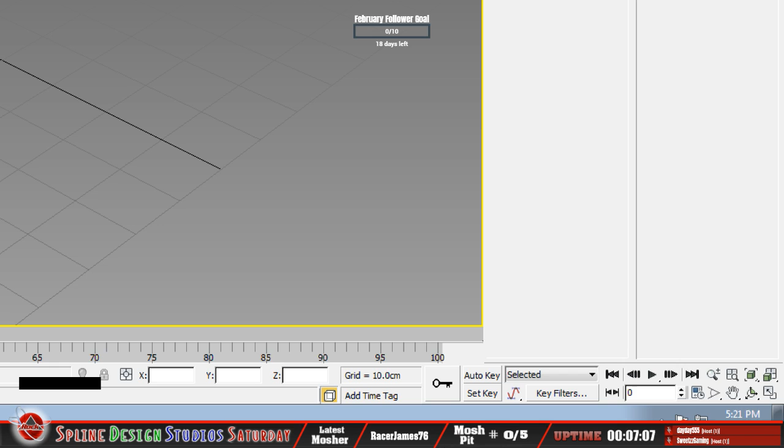If I do this, it ought to work out kind of nice for being able to show off, especially in Sandbox. So if I right click out of that, because one of the things I was looking into last week was how you get the coordinates for the pit stalls, and the fact that even for myself I couldn't see.

You got to really look down there on the bottom right corner. So this little tool I got here lets me zoom in on this and kind of show that off. The only problem is it doesn't allow me to use the cursor, but at least it'll kind of bring it down there, I guess. So something else I just kind of got a hand on. I don't know if it'll come in handy or not.

Okay, so let's get out of that. There we go. Yeah, so that works, getting in and out of it at least anyway. I don't know how well that'll work. It works well for things that are static. So, yeah, just noticing that if I do zoom in on it, it kind of makes those numbers go away. I don't know if that's going to make... well, it may or may not, because as you see, if I bring that back on, I guess it does. The only thing is like if I'm on the...

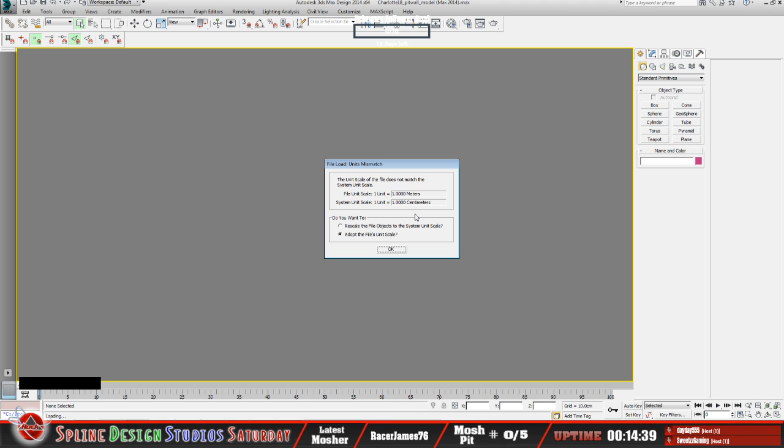There we go. And what I did... oh crap. Crap, I forgot I was working on farm sim stuff. Yep, trying some things out, so I gotta rechange my adopt the unit scale. I don't know.

I'm gonna reset this, yeah, because I don't think it's gonna take that. So I gotta adjust all my units of measure back. It uses a different unit of measure when you're dealing with farm sim stuff.

So I got some things to hopefully showcase, I guess, as far as farm sim editing. I've gotten into the map editing as well, to include some... okay, so that's good, and that's good.

Just gotta check these two areas, so that's got to be in meters and that's got to be in meters. Okay, we're good. So I'll go ahead and open it again. I shouldn't get that dialogue again.

But yeah, as far as just individual static items, as well as have been tinkering with some map editing. Farm Sim 19 is way more complex than 15 or 17, for that matter, as far as how it... like I said, I won't go into too much detail about that, but there's a lot more involved with it.

It's huge. I mean, it's nice, don't get me wrong, as far as what they got in there, as far as what you can do now, as far as designing your map.

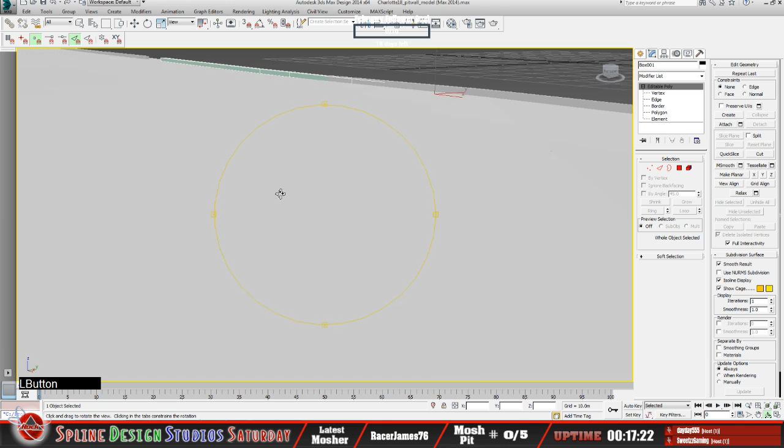Zoom in on this. So yeah, I think we did already turn it into editable poly. One of the things that we came to include last week as well was the fact that when I put this in here, this wall... get over here, kinda hate when it slows up on me.

Oh, okay, yeah, so this is the rest of the track mesh, so you can see the difference. I still have, I didn't chunk out this part. This is a part of the DAE as far as the track geometry that we imported in, and then we started this part of it here, so it's kind of overlaid on the new piece.

So if I hide the track mesh, you can see there's our newly 3D modeled wall based on... that's without the track mesh in there.

So one of the things I was going to point out, I guess, as far as the height of the wall, as far as the way the wall was oriented there, when I exported the DAE, I still had it in the other orientation. We had to change the thickness and the height of the wall.

So yeah, when I did the DAE, I did not transfer that over. So we had to reassure ourselves that we were creating the newly 3D modeled wall in the proper size, as far as the height of it and the thickness and all that jazz.

Because just to kind of give a little bit of summary on that, if I highlight this geometric wall, we changed the thickness, whatever, to a 0.45 as opposed to a 0.50, and then the height of the wall was a 0.5. So when we were creating our new 3D modeled wall to what we wanted here, we didn't have it this way in the model as far as the exported DAE.

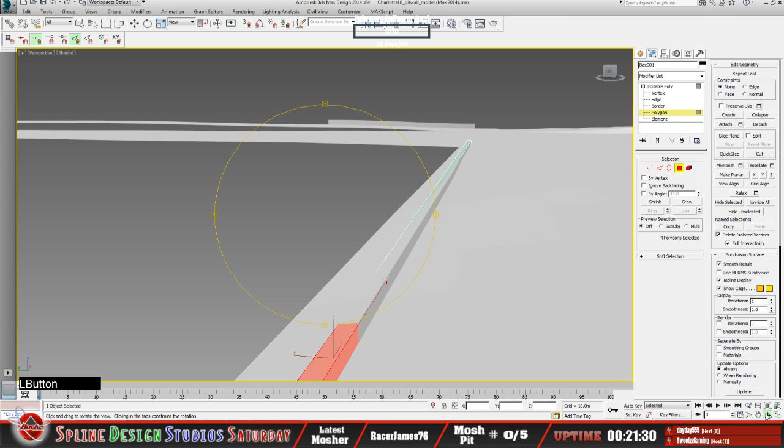So we're trying to, at least, we kind of dissected, I don't know if it'll let me select. Let me focus on this part here, zoom in on that. So yeah, if you notice, what we tried to do is dissect the 3D modeled wall into the geometric wall, because it gets narrower in this part. This is primarily where it starts to, so that's not very useful to us as far as the geometric wall. So again, that's why we've had to create this 3D modeled wall to help correct that.

So what we did was just try to dissect. Let me go into vert mode here. If I grab this vert and zoom in on that, just so we can get an idea of what's going on here. So as you can see, here's the geometric wall, and it's kind of maybe somewhat hard to see. You can see the geometric wall, how it's real skinny right here.

This is what we're trying to replace. So the fact that it's got all this bow and all that good stuff in there, we can get rid of a lot of that with this 3D modeled wall. Because we do have curved sections in here, as far as tracks, geometric track segments, we can fix a lot of this warpage.

As well as this taffiness, I guess, on the geometric wall. So that's how I've got this newly 3D modeled wall kind of set up that way, so that it takes advantage of, we have that as an option. I guess that's what I was trying to be able to fix a lot of that. So we should be to the point now,

with all that done, to texture this thing. And I did put some, let me get to this end here. So there's our opening, there's the other end of the wall. I'm going to go ahead and hide the track mesh again, like so. Now here's our 3D model wall.

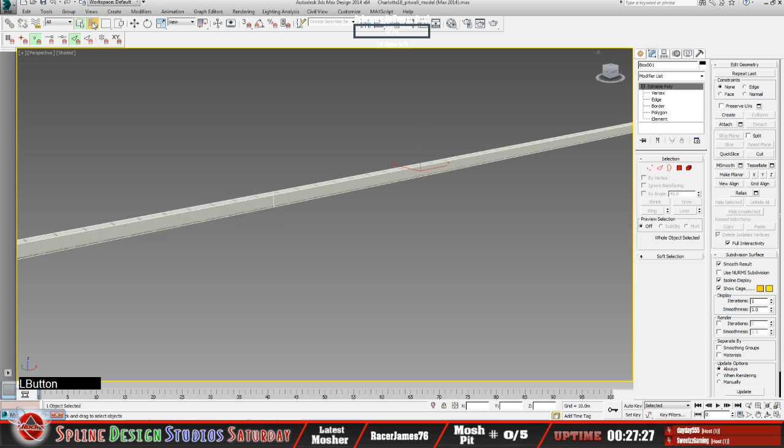Okay, and then here, let me do it this way. This might show it a little bit easier. So if I hide this, that's just the top, so that'll have its own texture.

So what I can do with this one is I can go ahead and just hide this one and bring back the other piece. Box 1. So we want to texture this with just the wall texture.

So vertex, I'm just going to highlight this one, zoom in on that, just to kind of get it to focus a little bit more. So the top part of that wall, as far as the entire model goes, is not present here. So the only thing we're dealing with is just texturing the ends as well as the left and right side wall. It's pretty good actually so far, but I'm going to check the mapping on it anyway.

We're going to apply an unwrap modifier to it. We'll check the texturing of it. Alright, so let's do that. So if I go...

Whoa! 7 months. Holy crap, 7 months. Scared the bejesus out of me, dude. Yeah.

That's interesting that it actually worked, because I know Twitch was doing some things with, I don't know if you're aware of that, James. Thanks for that, anyway, by the way. But to help explain a little bit as far as what Twitch was doing, they have what's called cumulative subscriptions, which means if at any point, as far as subbing to a channel, if you have a gap in there, as far as like, you know, if you miss a month or two or whatever, it'll still count. So like that 7 months that you have, that's amazing, by the way. I can't believe it's been that long.

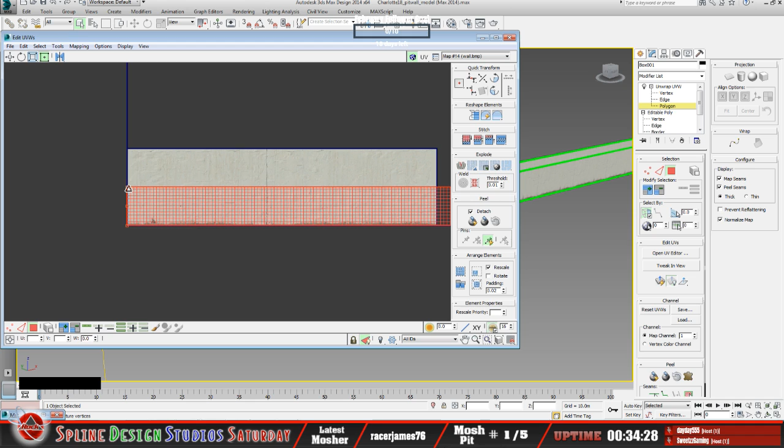I'm going to go ahead and select this one, and I can do a shift and just drag this up so it stays straight, like so. That should be pretty much all we got to do.

I can keep this, and I didn't apply any type of normal or flattened map because the way this initially presented here was okay. Sometimes your polys that you got selected won't be like that, so you'll have to play with the mapping as far as either flatten or normal map. In this case, it's a pretty simple object, not that complex, so it kind of presented itself pretty good. The only thing I really had to adjust was that.

So if I look at the deal in here now, all it did was I just stretched it up the top edge of that poly up to here. So now this is a 1-to-1 as far as the orientation, to get the dirt on the bottom, and I just moved that up to the top.

Let me see if I can show how that changes. Let me zoom in on this enough, go back into here. You can kind of see the texture actually adjust on that poly as I do this.

And this is a little bit off too, now that I look at it. If I zoom in really close, you can see how much that's off. So I'll go ahead and adjust this again.

Alright, so let's try another poly here, still in the unwrap modifier. So now we'll do this segment of the wall. So we'll go into this, and it'll be right here.

I may be able to get away with not having to move that, actually, but I'll probably go ahead and do that anyway. I'm considering whether or not I'm going to apply ambient occlusion to it, which I don't think I'll need to. I don't think it'll be necessary as far as applying any shading to it. So what I can do is, in this case, I can probably just move this.

And I won't have to do a flatten or normal map. It's much the same as the other poly. All I need to do in this case is grab this, I'm going to zoom in on it more. Actually, what's going on here? Why does it have this... whoa.

That's got like a height change on that. That shouldn't be. Or did I not change it? That's a good question, let me see here. I'm going to have to check the heights of these verts, because I don't remember if I didn't think I did, but maybe I did. Let's see, I might not have changed this all the way through on the height.

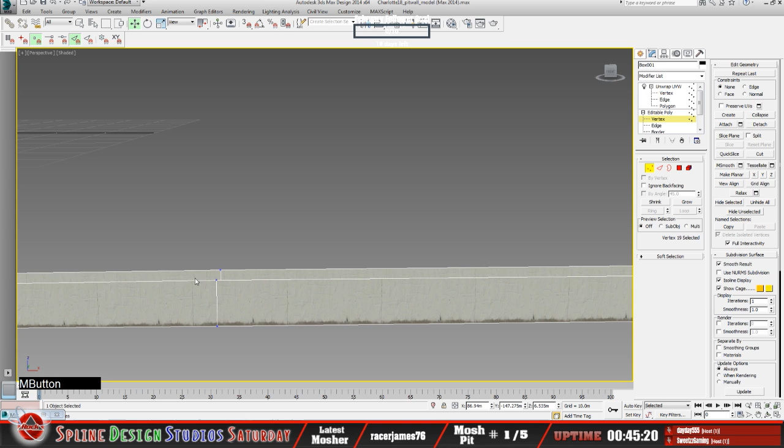Alright, paste that in. Yeah, so we got to bring this all down. And I still have it copied to the clipboard, so all I have to do is the same value. I just got to bring this down so it all matches. This was part of the adjustments I made to the height of the wall and all that stuff, and I did not transfer that over.

And I think the other thing I might have done, I don't remember - it's kind of going back to last week there. I might have just lined this 3D model wall to the geometric wall, which may not have been a good idea. So we definitely want to have this 3D model wall the same height. Okay, so we just got it right here, so get that.

That's definitely not all the same height. Oh man, what the heck did I do there? That's not too many. What the? Alright, what's going on there? The heck? Hold on. What is going on there?

So that can't be right, what's going on? Why is it going down so low? Yeah, see, I might have a bottom piece there - I might have to get out of that too, because I did use a box to create this thing. Not sure why it's doing that though.

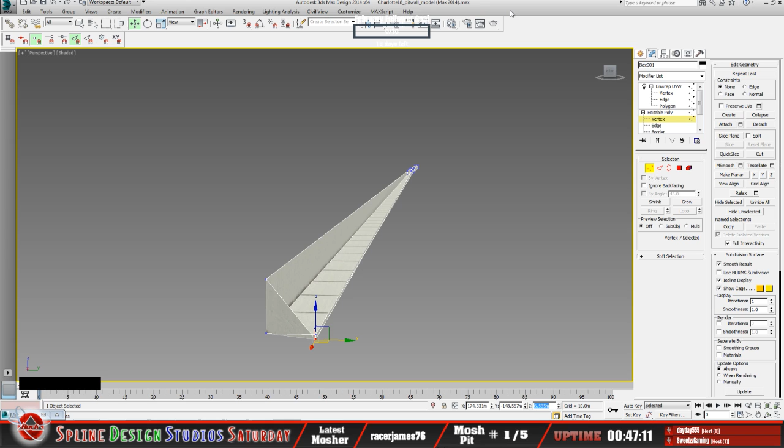I got this to one vert. Interesting. So if I paste this over - what the? Why is it doing that? I don't get that. Huh, alright, Control Z. There we go, bring it back. Yeah, so I don't know why it's different on this end. Something's not - what is going on?

So I was able to adjust all the other verts. Something's not working out right here. Let me check this again. It's a long piece. Alright, so here's this one. We'll get down to the bottom of this. Alright, so if we zoom in on this - huh, am I not copying and pasting that all the way through?

Let me see, something's going on. Should be able to adjust that to the same height. Alright. Sheesh, okay, we go like this. We'll zoom in on that. Paste - what the? I don't know why it's doing that.

It's not like I'm adding a digit or anything to it. Hello, Control Z. Hello? Alright, I don't know why that's not working. Yeah, I don't know why it's doing that. I should be able to put all these heights the same level. Why is it doing that?

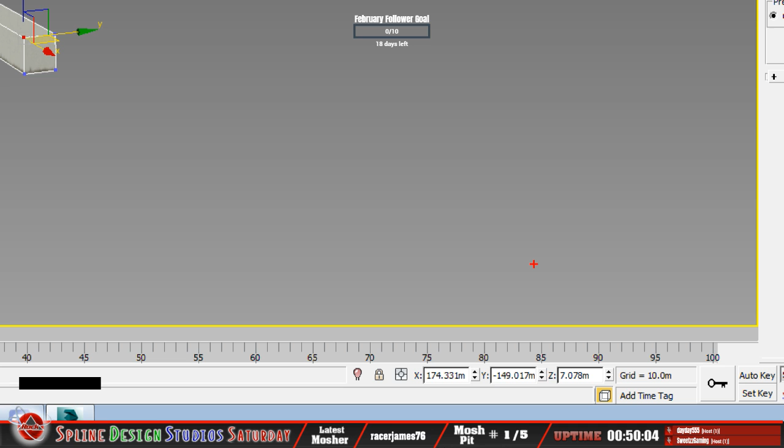Huh, yeah, this one's at a 7 - I don't know if you can see that. Kind of show that, so this one's at a 7.078. Okay, we need it at a 6.533, I think it was. So the fact that it won't let me adjust it down, I don't know why it's doing that. That's kind of crazy.

Now it may have something to do with - now that I think of it, it might have something to do with the height values that I've got in the 3D model itself too, because it's based on the DAE. So I think what I did was I adjusted the height of the wall to that geometric, which I think was wrong. Trying to think here. Alright, let me bring the track mesh back, let's do that. Okay, I may...

Trying to figure this out. What did I do wrong here? Might have to keep that right where it is for now. Kind of see what's going on there. Yeah, because it obviously is not... the fact that it's squashing it all the way down to that, that's not what we want.

So that looks right there as far as the height. Okay. Let's get out of that. Hide that again. I suppose I'm going to have to leave that the way it is for now.

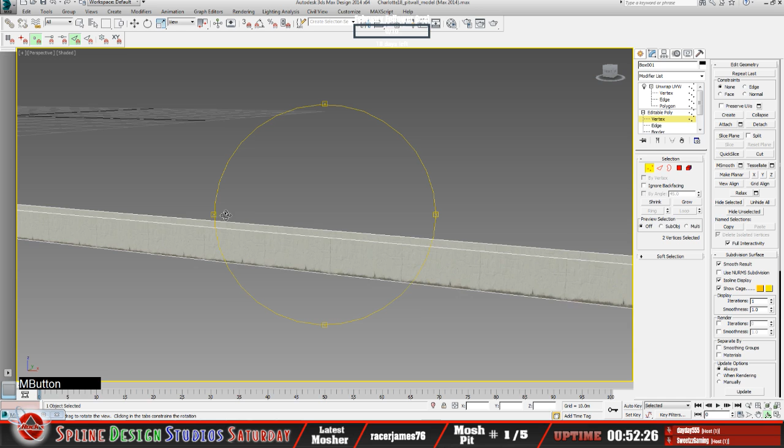Okay. Let me try this once again. Alright, so if I do paste. Yeah, that's obviously not what we want. Interesting. So we'll just have to leave it that way for now. I guess if we have to adjust it, we'll do that.

Let me check. Man, this is a long object, so I'm just going to focus on vert here and just zoom in on it so I can focus on that one area of the model, like so. And let's bring back in. I want to see the height of this part.

Yeah, let's bring that back. Unhide the track mesh here again. Yeah, see, maybe that's not what I want it to do. Because I'm keeping in mind that this model wall that I did here was not at the right height when I did the DAE. I was just looking for the location of the wall.

So, yeah, you can really see the difference in the height of the wall that way. I had it at a... I don't remember what I had the height of the wall at. Oh, this is going to bug me now.

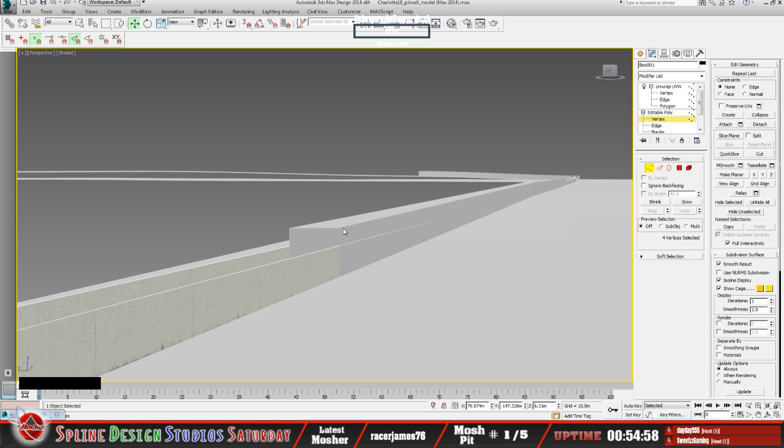So what I might try and do is do a new DAE and chunk that out so that we can line that up properly, because I did not have that set correctly when I did this exported DAE here. This is why. I think that's why I'm having this much problem.

So we'll keep this here. All I want to do is create a new DAE based on how we've got this correct now. Hello? Right here. Okay. Yeah, I think that's what I'm going to do.

I need a... I don't think I saved the other DAE. Let me check here. I don't think I did. I think I saved it and then just chunked it out and I imported it into Max. Okay. We're going to get this thing fixed because that's not going to work.

Alright, all I need to do, let's bring over to 3D SimEd, and we're going to open up that PTF in there. So let's go ahead with that. So if I bring up 3D SimEd, okay, and oops, I'll bring that back up. So the way we're going to do this, we're going to import, and I'm going to navigate to our track that we have currently loaded in Sandbox. That has all the proper dimensions of the wall itself, to include where it's oriented.

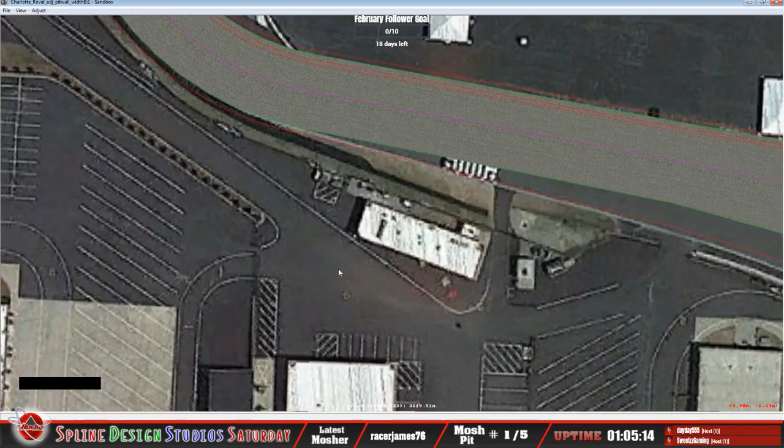So if I load this one, okay, let's do a new on this. Got that saved anyway. So if I open up this one, okay, and let's zoom in on that area. This one here, I still have the texture applied, and yeah, this one's not corrected.

Okay, that was the pit wall width. Yeah, so this one is not. Hold on there, yeah, this one's at the 0.45. The height is 5. See this part of the wall here, the geometric wall, I did not adjust that yet. That's why I'm using the other PTF, because that one is at the proper height.

Yeah, see, there was two different sections. Just to summarize, I did one section where I adjusted the pit width when we were adjusting our stalls, towards this end of pit road, and then I did a pit B to do it up to this point, and not this. So that's why this one I'm loading here that I did off stream is not set correctly, but this one I've got loaded to do the DAE, it is set that way. So it seems backwards as far as the way I label them and how they're dated. That was just to humor myself a little bit.

So this is where I did not adjust it yet, as far as this part of the geometric wall. It's still legit, because all of these walls that will maintain are the proper dimension. It's just not this one. So that's why, yeah, it's all good.

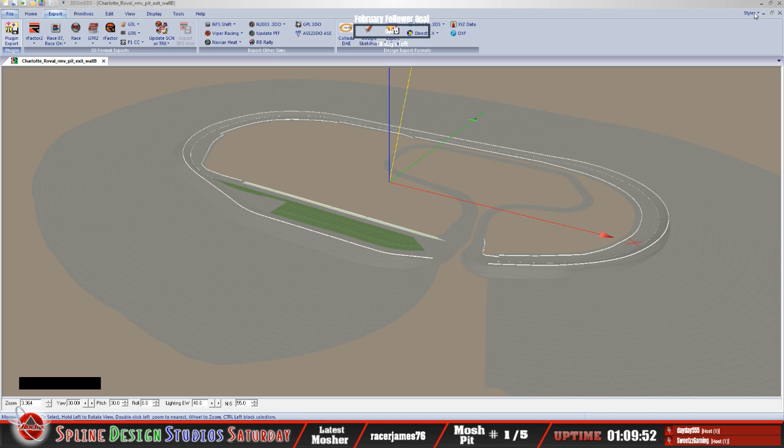So we're good there, so we can close this. Exit out of that. Alright, so now this DAE, let's leave that right here. We're going to load that into 3ds Max.

Kind of backtracking a little bit, like I said, but not too terrible. Actually, what I'm going to do is open up that scene again that we've already got saved, and we'll just re-import. That should all be lined up. Yep, so let's just go here.

Alright, we'll just open up this one right here. And what we're going to replace is this track mesh model. So we're just going to delete this one. Okay, and we're going to import the new model.

Okay, so we'll just navigate to that. We just put that on the desktop, which is this right here. And I'll have to chunk out a lot of stuff, but that's okay. Yep, just click OK on all those warnings.

So here's our new one. Yep, this is our updated geometry, so that should line up more precisely. So here's our, you can see our 3D model wall in here.

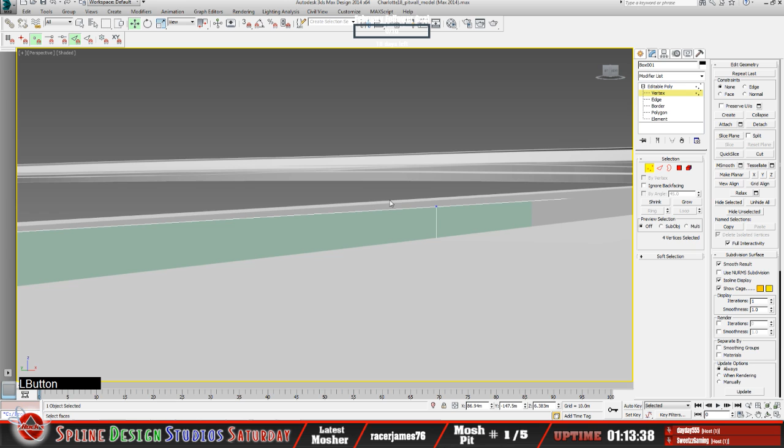So basically what it boils down to is we are not able to put all these top verts, I guess, at the same Z. Okay, again, because this wall, the geometric wall, that is 0.50 all the way through. Okay, we got to keep the top of this 3D model wall the same height as our geometric wall. That should hold true all the way through to this.

Alright, so if I bring these back up here, and this might be a little bit tougher because - actually no, I didn't reopen that scene, so I should be able to apply these two verts. Yeah, two vertices selected. So I should be able to bring this up like so. Yep.

And all I'm doing is lining it up to the wall, the geometric wall height. It's definitely going to be different. And I think this is what we did last week too, as far as just lining it up that way. The only thing, like again, we were trying to create - I know I sound like a broken record - is that skinniness, you know, the taffy effect that it was applying to the geometric wall on that end, as far as the pit exit.

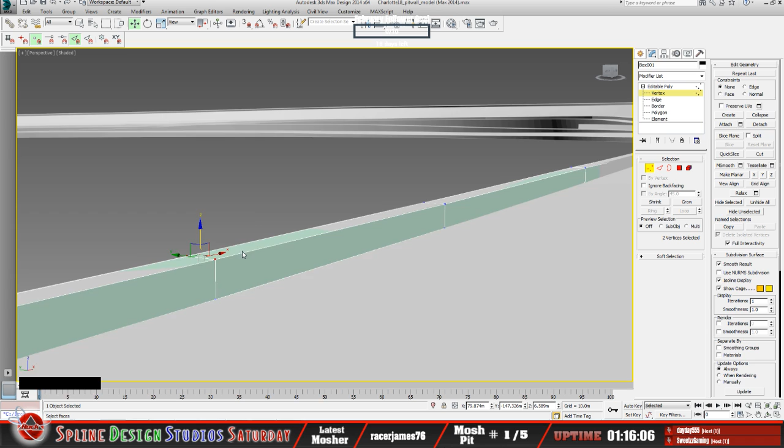And I could probably get a rough idea. I'm willing to bet that all these Z's on these verts here for the 3D model wall are not going to be the same, because of the trajectory of the pit wall itself. Because there's elevation in it, it's not going to be the same.

Because it's probably, yeah, I can already tell through the track mesh itself that there's a little bit of a hump right here. So that's going to change the height of that because the wall is actually going upwards. Keeping in mind that our 3D modeled wall is based on one point, which is more than likely probably down there than this end. So that bottom, as far as how it's figuring the Z for this top vert, for example, it's based on that point.

So, you know, a lot of that probably doesn't make sense. It makes sense to me. Because there's elevation in this, the heights of all these verts are not going to be the same. This is the bottom line.

So let's check on this very end here. Yeah, I can already see if I zoom in on this. Yep, if I zoom in on this, you can see, here's the geometric wall. You can see that poking through right here. So if I adjust these up and down, you can see how that's bleeding through. So that's the height we want that to be at, as far as our 3D model wall.

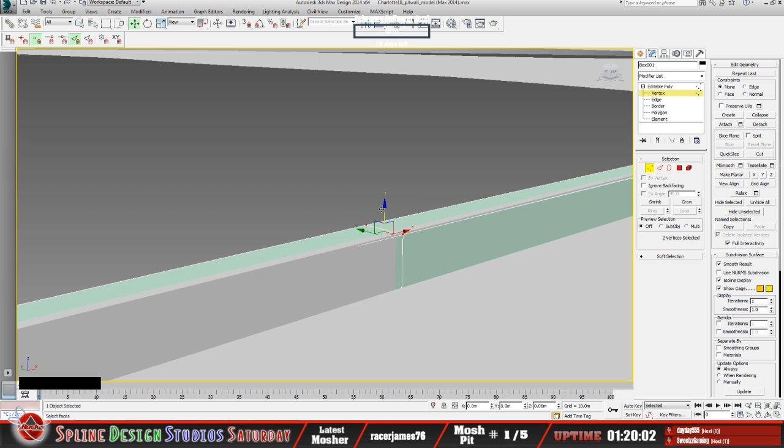So it's got that cut into the 3D model wall now. So now I should be able to go to verts. Select those two verts and then I can adjust those and zoom in on it. I should be able to adjust these accordingly, like so. Yep, trying to follow that contour of that wall as much as possible.

Now, by doing all this, now I think of this, if I was to adjust any of the heights geometrically as far as in sandbox there, that's going to change the attitude of this geometric wall. So that's something to keep in mind. But the fact that we'll have all the raw files, I guess, to be able to adjust that if that ever becomes a thing. I don't think we'll need to, but just keeping in mind, if you make any geometric height changes in the track in sandbox, in this area, at this point, if you were to make this model, that's going to change the attitude of this model. So I have to keep that in mind.

So I think we're pretty good on the overall design of this now. It matches the geometric wall. Okay, let me highlight this here so I can zoom. There we go. So let's, for the sake of argument, let's kind of humor ourselves here, so we can see that bleeding through. This is the green, our 3D modeled wall. Okay, so we're just getting it lined up to our geometric wall.

I can get really super OCD about how much of this will be adjusted. Yeah, see it's really close as far as, see how it's bleeding through like so. I think that'll be fine though, that should do just fine.

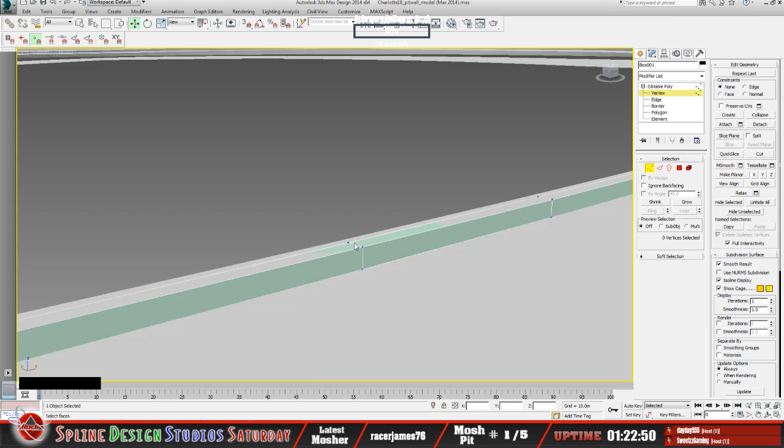I could do the same thing with the heights here too, instead of adjusting them all manually like I've been doing. It's not 100% wrong, but you can already see, if I get this vert, put the vert snaps back on here, that won't snap to that because there's no vert, because we did a swift loop on here to get this to match up. There's an edge there, but not a vert, so if I potentially put edge snaps on, I can leave the vert ones on too. It might snap to that. Yeah, so it'll snap to the edge at least anyway.

The only other thing that might cause more, it won't really keep this straight, so it kind of goes on an angle here. And you can straighten those up, that's not a big deal. But I think what I'll do, just for the sake of it, yeah why not, let's just go ahead and do it that way. We'll keep this stuff legit.

So we'll get it snapped to the edge, and then what you can do from here to get your vert straightened up here, because it's crooked now. And again, because there's no vert on the geometric wall for that to line up to, it's just snapping to the edge of the geometric wall, because we put a swift loop into our 3D model wall.

So what you can do here to get this straightened back up again is look at, in this case it should be the Y. And I can just check this one here, so 147. Nope, that'd be on the X, 79887. Yep, so you can choose at this point which one you want it to line up.

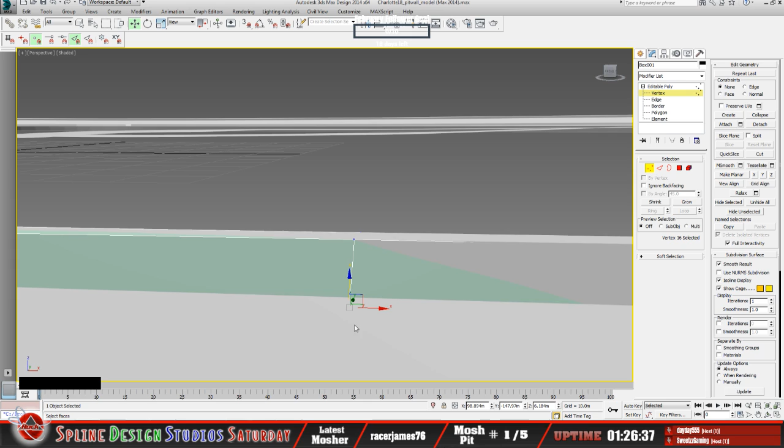Oh wait a minute here. Yeah, see this is something, okay this makes a little bit more sense now. So the fact that I was lining it up that way, I gotta move... holy smokes, okay so you can really tell again that there is some elevation difference in here. These verts here, so in this part here, this part of the elevation's got like a crown here, because the actual vert in this area is lower on this part here, so that suggests there's like a crown in this part of the elevation, or the cross-sections and what have you.

So what I need to do actually is, let me straighten this up first. Yeah, let's do that, let's straighten it up first. So we'll copy this. I see what's going on now, that makes a little bit more sense actually.

Paste this over to here. There we go. That one, let's get the back side. Yeah, I get this now, but I'm just trying to get this straightened up first.

Basically, because this vert is below the surface, I didn't need to adjust the top. That's actually taller than it is, and that's why this isn't the same height all the way across, because we're only considering the top here. We've got to move the whole thing, as far as where we swift-looped to here, up as well, so we can get that bottom vert snapped to the surface of the track surface itself, as far as the track geometry.

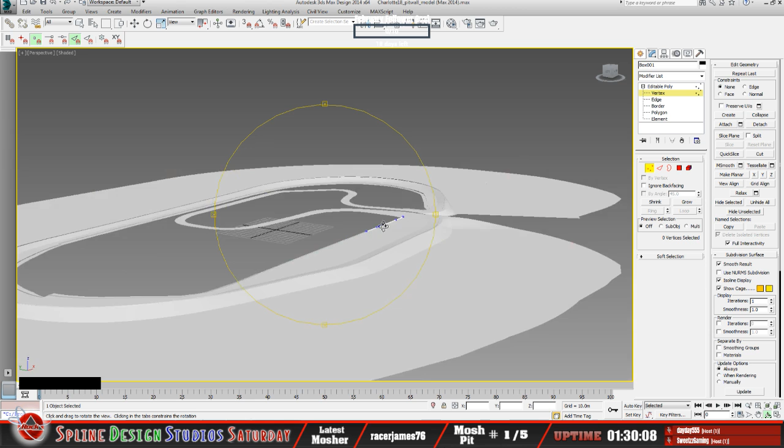The other thing we need to do too is get a lot of this track geometry out of here. We don't need all this, we only need this area. So let's go ahead and get some of that chunked out while we're at it.

Select this. Yeah, it doesn't really matter for now, I'll probably end up converting it over to a poly.

I want to keep some of the... what are you doing? I got it on poly, you dummy. Trying to drag select these.

So yeah, I'm going to chunk out some of this. We don't need all this information. What the heck are you doing?

Goofy thing. Let's zoom out some more, get some of this chunked out. We don't need this. This will kind of keep the file size a little bit smaller too, as far as...

Focus more on the area that we're trying to work on here, which is on pit road. We don't need all this. Okay.

Oh my god, I don't know why it keeps doing that. Goofy thing anyway. Yeah, I'm going to try and keep a majority of the pit road.

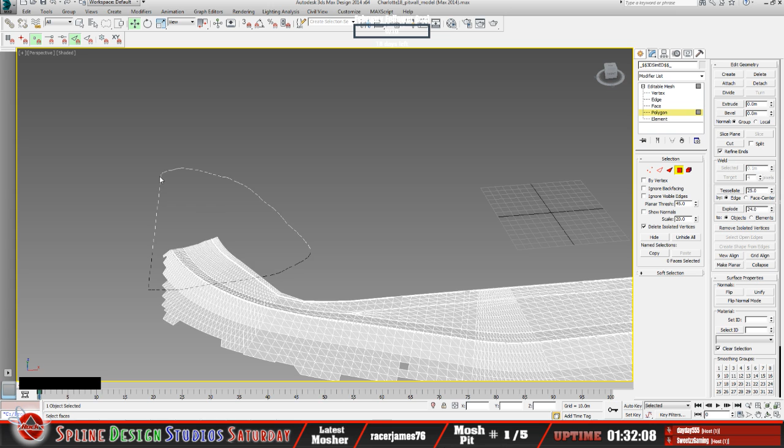I want to keep a majority of the pit road, so I'm just going to chunk all this out. Don't need this. This is probably a little bit better.

Okay, yeah, it's not too bad.

It's kind of weird not having any of that background music, and it's kind of a pity in a way that... the one stream that I did there where I had the music going in the background, it did kind of... yeah, so. Some copyright stuff on there.

Okay, that's looking pretty good there. Now...

What I need to do is segregate the geometric wall. So let me hide our 3D model wall, which is this deal. I'm gonna hide that. Okay, so now we just got that geometric. I'm gonna isolate, or try to, that geometric wall. So here we go.

Yeah, it's trying to load a lot of information, so it tends to get real slow. That's normal. See, when you highlight like this right here and zoom in on it, it'll kind of focus on that. This is somewhat what we started last time, as far as isolating that, because of all these little slivers. You can see all the polys that exist in here.

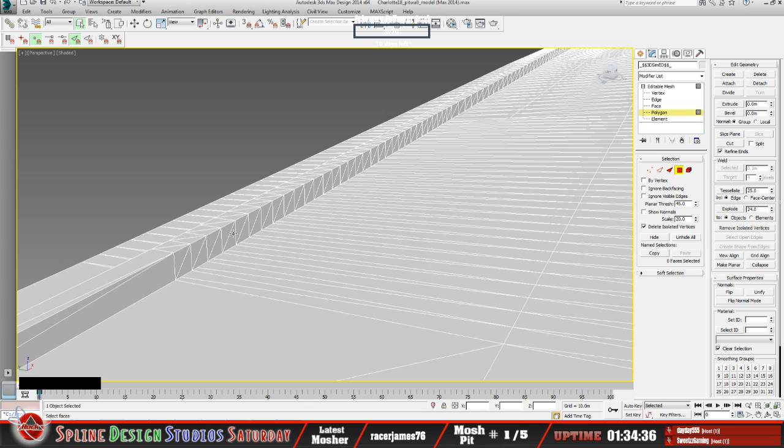It's not going to work this way, unfortunately. See, it's going to select all that. What I'm trying to do is isolate the geometric wall from what I could do, I guess. Let's just do it this way.

It's not impossible. So let's highlight this, like so. Yep, so we can get all this selected, and we can make that a separate object so we can better get at the geometric wall. Yeah, that'll work.

So this is using the paint select, and all these polys selected like so. Okay, so as long as you're only selecting those surface polys there and not getting the wall, we should be alright. It's kind of hard to see on that end. This is a lot of polys in here. I think we're good there, so we should be able to detach that as an object.

Oh, I know what I didn't do. But let me see if this still works though. So if I detach this as an object... Okay, it did work. Cool. Awesome. Alright, so now I've got that.

I'm going to hide this one. And again, what that does is it isolates more of that geometric wall. That's what we want. So we can better line up our 3D model wall to it, as far as the height and whatnot. Okay, so...

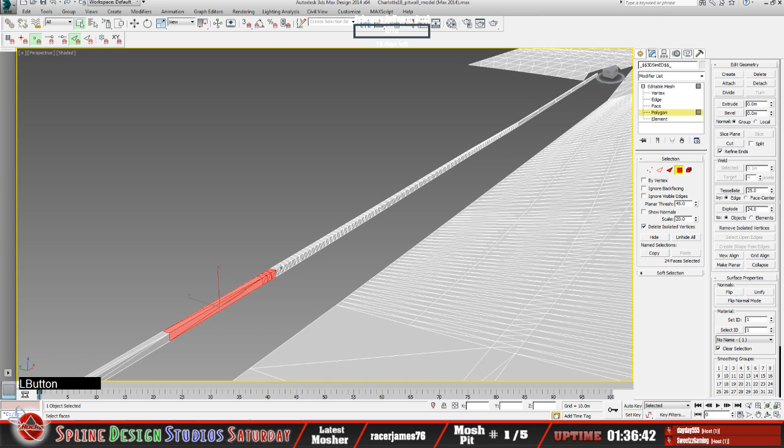Yep, so now I can paint... Hello? Oh, I gotta go into polys, that's why. Paint. Now I can highlight all this, create this as a separate object. Now there's a lot of polys. Oops, I forgot to put the control select on there.

Yep, something like that. Move this down. Hold control. There. Yeah, this would work a lot better. So now we got that wall selected. Now we can detach that as an object.

And you can label it. I'm not going to worry about it too much. But yeah, now we got that as a separate object. So now what we should be able to do, I'm going to hide the rest of this track mesh.

Bring in our 3D model wall that we're trying to create. So unhide that. That should be box 1. Yep. So now we can snap our verts and whatever to that geometric wall, as far as the heights and whatever, at least anyway.

Okay, so let's make sure we got our box selected here. And go to vert. No, verts. There we go. And I still got this on paint. Let me set this back to box select here. There we go. Zoom in on that.

Now what we can do is we can better align our verts to the verts on the geometric wall itself. Okay, so let's start with this one here. And we'll do these a vert at a time.

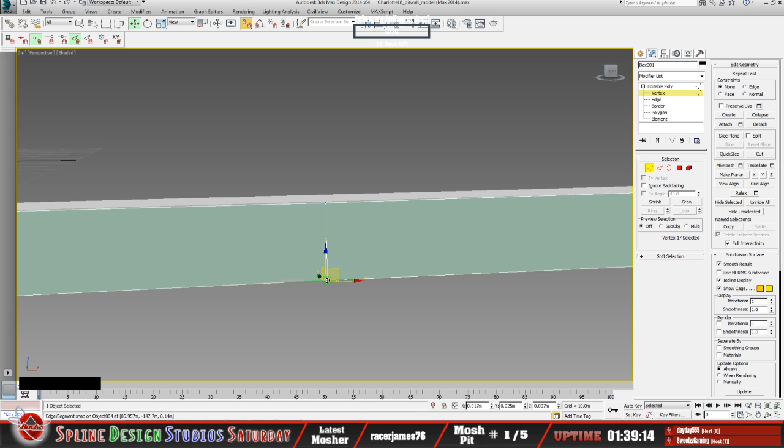Alright, so let's get this one here. Yep, so I'm seeing it turn. May not be perfect, but oh man, why is it doing that? Hold on. Yeah, because there's no vert there, it's going just by the edge of the geometric wall, as far as our 3D model wall.

So yeah, that should be good right there. And that should be good right there. So you can kind of see how it's semi-bleeding through on the geometric wall. It's kind of what we want. So I gotta get focused on this again. Zoom. There we go. Yeah, that's kind of what we want.

Now the only other thing we got to do is straighten up these verts here so it's not crooked. So we'll go by the bottom vert here, which should be the X. So we'll copy that, paste that to here. And all I'm doing there is just aligning it vertically is all. So that should be the same.

86.97, 86.97. And we'll make this one the same. It's not that far off, actually. Nope, not that far off at all. So that should be nice and straight now. Alright, next section here. So if we go down here.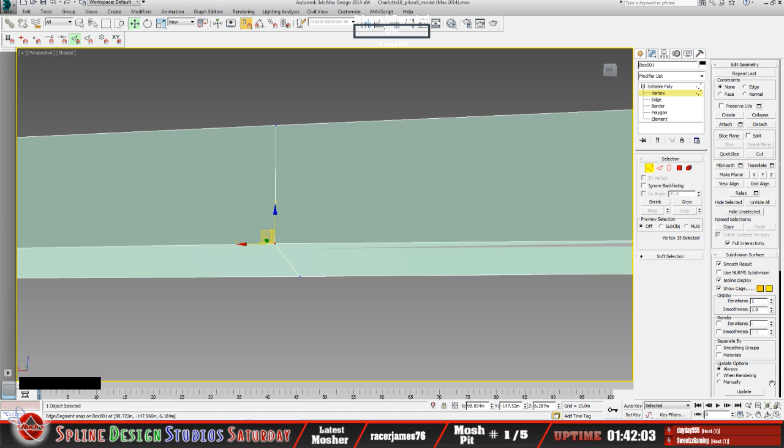So that's not working like I thought it would. No, it's really not working like I thought it would. So what I might have to do, as far as the edge snaps anyways, let's turn off the vert snap just for the sake of it. What I was hoping it would do is just snap it better to that edge. So what I'm going to probably have to do is just adjust that manually.

Yeah, let's do that, let's try it that way. So I'm going to take the edge snaps off. Select these two, and if I adjust it this way, so you can see the edge of the wall, that way. I might just have to do it this way. See how that's poking through?

That's what we need to adjust, because the actual height of the wall is fine, the top of it anyway. It was that part that was off, so we still probably have to adjust. Let's check it down here just for the sake of it, I don't know if that snapped correctly.

Okay, so if we go here, yeah, that one's actually pretty good. Alright, check this one. Zoom in on that. Yeah, this one's a little bit off, not too much. This one's actually pretty good, it's maybe a little bit low.

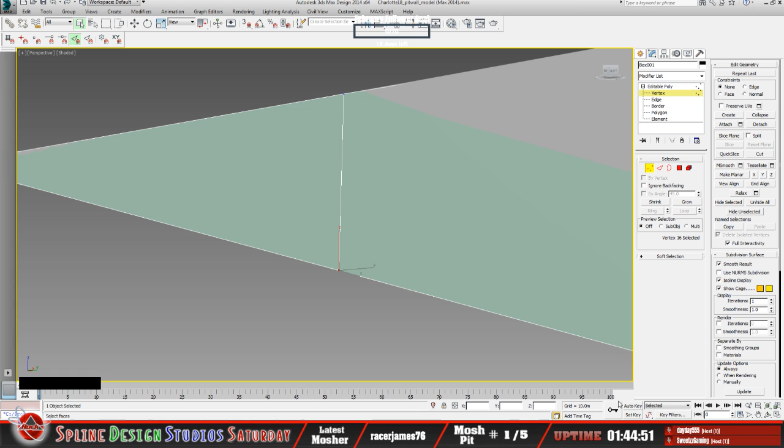Okay, not a huge problem though. So, yeah, this is the one I was checking out here. Zoom in on that. Okay, so, and again, I don't want to go by, you can see the geometric edge right here, it's kind of poking through. That's where it starts to get skinny, so we don't want to really mess with that anyway.

The fact that I'll probably have to take these faces off the bottom anyway, I don't need those, so let me delete those out. Yeah, these polys here we don't need, so that might kind of help our effort as well. Just thought of that.

So yeah, these, that's our inside poly. Okay, yeah, so these polys here, yeah, we definitely don't need these, so we'll delete those out. That's on the bottom, you're not going to see those, those are going to be face to the ground. Okay, so that should be, yep, that outside face there, that's fine.

So we're going to take all these bottom faces off this 3D model wall. Let's make sure we got all those out. This is a long section of wall, that's for sure. Alright, zoom in on that. Yep, so we got some on this end too. Alright, so let's focus on this. Delete that, delete that, yeah, that's just getting those bottom faces off of there.

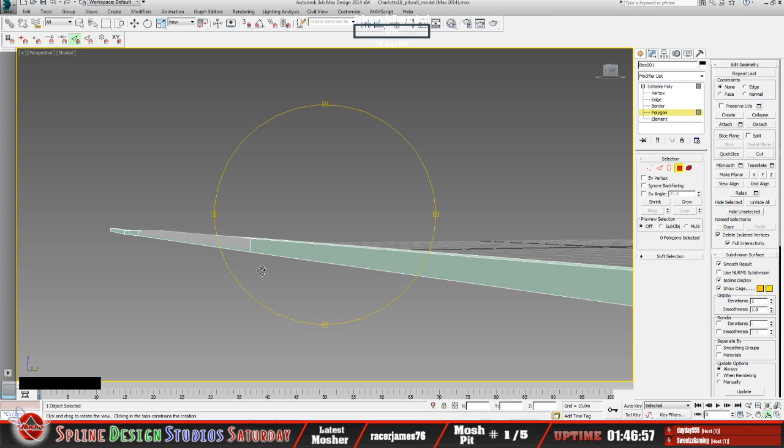Okay, I don't think there's really much more we can adjust. You can really see from this angle how much of a wonkiness there is in that wall, as far as how it kind of crowns up right here, and that's what we're trying to get adjusted. We're trying to get the 3D model wall to contour the same as the geometric track itself.

So the main area that it tends to do that, I might have to put another swift loop in here, is like right in through here, because this is our pit exit end. Okay, and we did put another swift loop towards the end there to get that adjusted, but almost thinking we need to put, wow, holy smokes, I can really see that difference here.

Yep, looks like we need to put another swift loop in here. I don't know if it's hard to see, but you can see right here. This right here, that's the geometric wall, the contour of it as far as the side profile. And this is our 3D model wall, which is the green. So if I pan this across, you can see how that geometric wall really changes.

So on this end here, this is going to the garage area, and this end would be towards pit exit. So you can really see how that geometric wall contours. Let me put this more on a side-on view, you can get a better idea. This is full side-on view, you can see that geometric wall, and that's at the right height. That's the height we need.

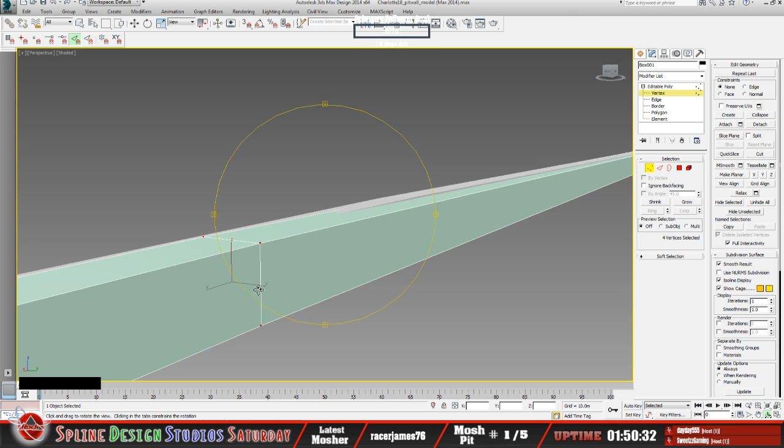Okay. So we might have to put maybe another swift loop in there. Yeah, it's not too bad there. Yeah, I didn't realize there was that much of a crown in that wall there, but it definitely is. Let me see if I can move these over. I'm moving all those verts that I just swift looped all together. They're all selected.

Wow, that's crazy. Yeah, seeing on this end, wow, I didn't really think it was that wonky. Apparently it is, though. See, I don't want to adjust the thickness of our 3D model walls. That's the thickness that we need it to be. It's just that it obviously has a crook in the wall.

Wow, okay. Yeah, there's a lot more going on with this geometric wall than I thought. I was thinking it was a lot more straighter than that, but holy crap, that's got a huge crook in it. Let me see, can we even see that, open that up here.

Yeah, I want this one here. Yeah, that was after the fact. Yeah, so I want this one. Alright, I want to take a look. I did not realize. Crap, alright, that's not the one I want. Let's try the other one that we saved.

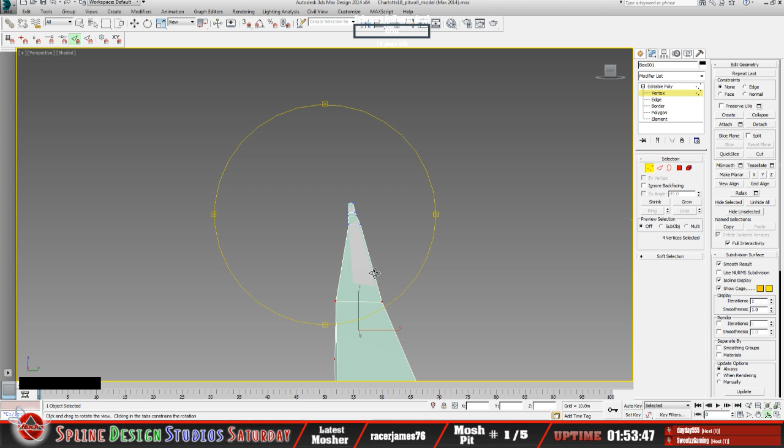Yeah, this is where it starts to get skinny. That's why we're seeing what would appear to be a crook, but it's not really a crook. As far as it gets crooked, it's just where it starts to get skinny. So, question is, how do I get this? Yeah, we definitely don't want that. Wow, this is such a long strip. It doesn't seem like it's that long, but it's pretty long.

Definitely has a lot more going on to it than I thought it did. Oh, shoot. See, what I don't want to do, and I guess this is what I'm pondering, I don't want to snap our 3D modeled wall entirely to the geometric wall, because we're trying to straighten it out because of the taffy effect, I guess, on the pit exit end. So I somehow need to figure out a way to get the trajectory of the wall correct, as well as keep the consistent thickness of the 3D model wall, and not go 100% by the geometric wall, because it's not what we want visually.

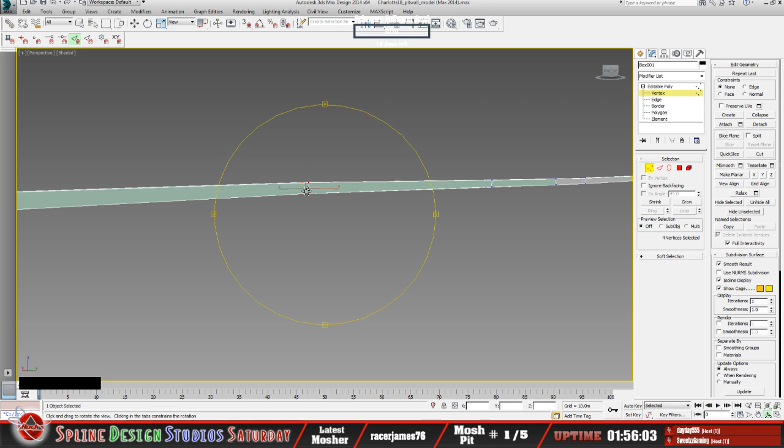Okay, so what I'm going to do, just to correct some of this crookedness because of how the geometric wall gets created, I'm going to do it this way. The height I'm going to change for sure, and then I'll check all the vertex coordinates to make sure that from here to here, the bottom of the wall and the top of the wall are the same height, because we definitely still want to maintain that.

Okay, so let's check. We're going to check the Z.

Okay, so actually that one's going to be higher, so I need from here to here that difference. Let me get that. So this one. Alright, bring the calculator out. 7.014 subtract 6.485. Alright, so that difference is 0.529, so it's a little over half a meter.

Okay, so now we'll check this end here. Let's check this difference. So this one's definitely different. But that's to be expected because I got this raised up.

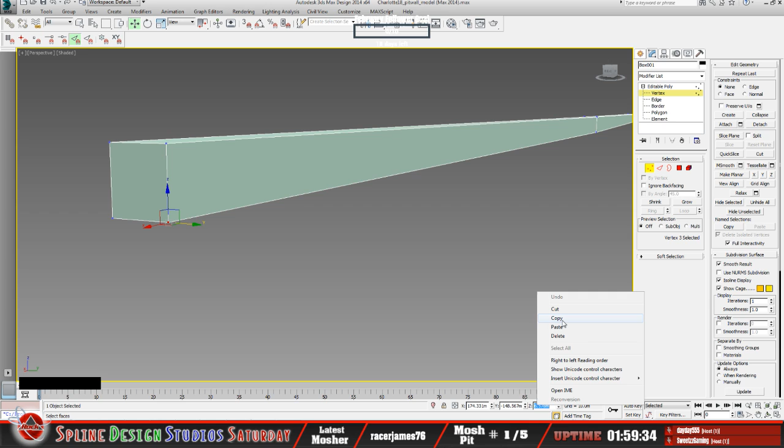So let's check this vert. It's definitely thicker on this end, it seems. It would appear. So copy this, put this in our calculator. We want things to be correct. 7.82, subtract, see how this one's going. Copy that, paste that in the calculator. Equals. Yeah, this is closer to what we need it to be. Okay, that's at 0.504. So this end is fine as far as the height of our 3D model wall.

As we get this way, it gets thicker and then it gets skinnier again, so that's not good, don't want that. So in order to follow the contour of the track as well as to maintain... how am I going to do this?

Alright, let's zoom in on this. This is definitely way too thick here and all that. Can't even see the... where's the... oh, there's the... is that the geometric wall right there? Holy smokes.

Okay, that's way the heck up there. Alright, so let's turn on... just for the sake of it, turn on our edge snaps.

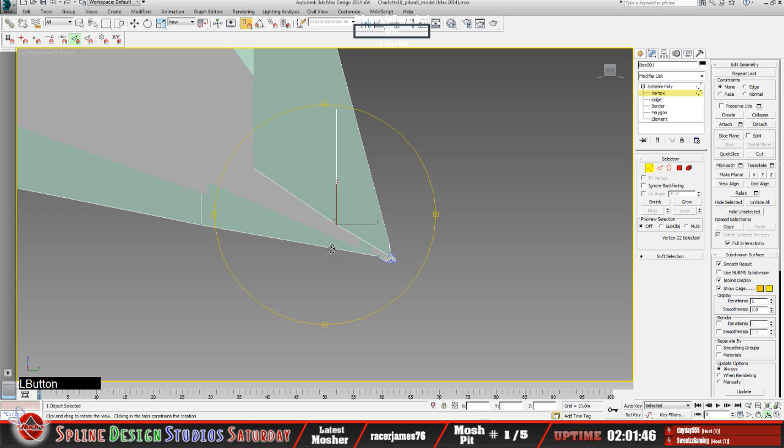Dadgummit, yeah, so it's definitely not going to snap correctly that way. Let's bring that back up. What? Yeah, because again, what I'm trying to do is get it to snap to the bottom of the geometric wall, and that's not working too well.

That's definitely not working like I was hoping it would. Let's try. Let's hide this geometric wall. Turn snaps off here for a second. Hide that. Let's bring back the... fudge, I forgot which one it is. Yeah, so there's our track surface.

What I might do is try to go by that instead. Yeah, this is the track surface that I segmented out, so you can see how much our 3D model wall is below the track surface. That's probably a better representation rather than trying to go by the actual wall.

Yeah, so let's try that. So if I select this, yeah, what I might try and do at this point is just trying to move. I don't know if I can do an edge snap, but what the heck? Okay.

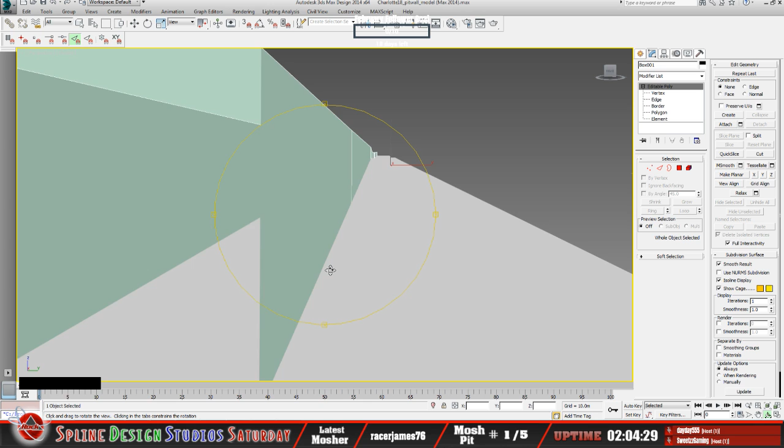Nope, nope, nope, nope, nope. Okay, go back, there we go. So yeah, what it's doing is it's snapping over here, so it's not snapping the way I need it to. So... gosh darn it, anyway. Freaking zoom, it's such a huge section. It's ridiculous.

Alright, so let's... yeah, but you can clearly see how far that 3D model wall is below this track surface. This is the track surface right here. So if I move this up like so, that's where the bottom of the wall now is mating with the track surface. So that's how much that's off.

Okay, so what I might have to do is just do that manually, as far as these different verts, to get that to mate up there, because it's not snapping the way I need it to. But you can kind of see now how it's... here's the edge of the 3D model wall, how it's more mated to the track surface just by moving it up on the Z on that.

So let's try and move this one. Okay, we'll paste this to here to get that the same as this one here. Okay. Yeah, so now we got that both the same there. So that might be the best option that we'll have there, as far as getting that mated to the actual track surface and still being able to maintain the thickness of the wall and what have you. So that's probably the approach we'll have to take to it, as far as just to move the verts independently. So yeah.

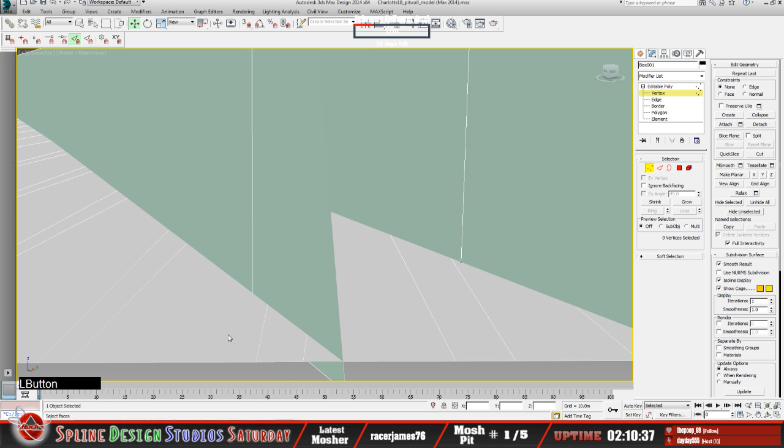So yeah, let's do that. We'll bring this one up manually like so. Alright, and then we'll just copy this vert location to the one on the back side of the wall, over here. There we go, just making sure I only got one vert selected. Okay, I'm going to paste that in here, so now I'll put that the same height as the other.

Now, check our differences between these two, so plug this in. Okay, so paste that in there, do a minus bottom vert. I can already tell this should be just by the value there. That's still a little bit much there, so I could probably bring the top down. The bottom's probably correct, but I could probably bring this down. Yeah, so the fact is I'm just gonna adjust this manually.

Oh, wait a minute, I took the wall out, that's right, I forgot about that. Let's bring that back in there just for a minute here, so it's object 4. Yep, so now I got the wall to go by. Yep, so just gonna bring that down a little bit like so, and then I'll copy that Z to this one.

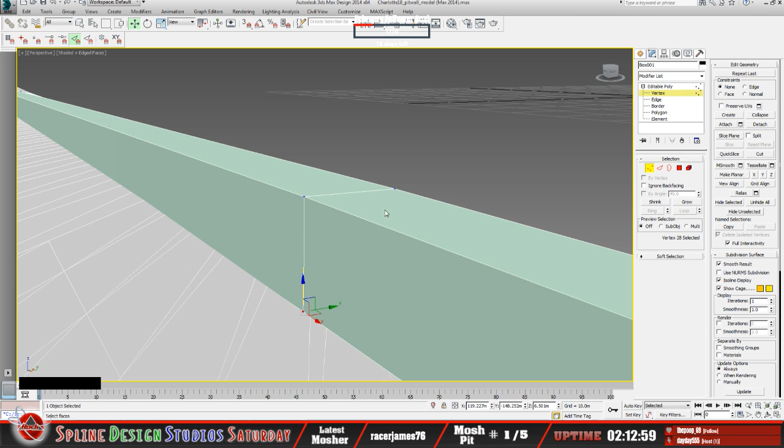Still going somewhat by the geometric wall as far as the height to get that correct. So now we got the correct height, pretty damn close on our 3D model wall. We've got to adjust this further down, all the way down, so we can see a lot of our 3D model wall is still below the track surface. So our thickness is right, our height is correct, so we're all good there.

Excuse me, need a drink.

A little bit more complicated than I thought it would be, as far as getting this aligned to the geometric wall, but also to the surface, because there's a little bit of elevation in there. But we need to definitely make sure we're keeping the height of our wall the same. We want that consistent all the way through and follow that contour. We don't want it to be higher in different spots by only adjusting the height of the wall, I guess you could say, as far as these top Z's.

So we're going to go to, I might have to put another Swift loop in here, because as I was showing, you can see a part of this is still sunk into the track surface here. That might not be too much of a big deal right there, but you can see that's got a little bit of a crown right here. You can see how it's not 100% straight.

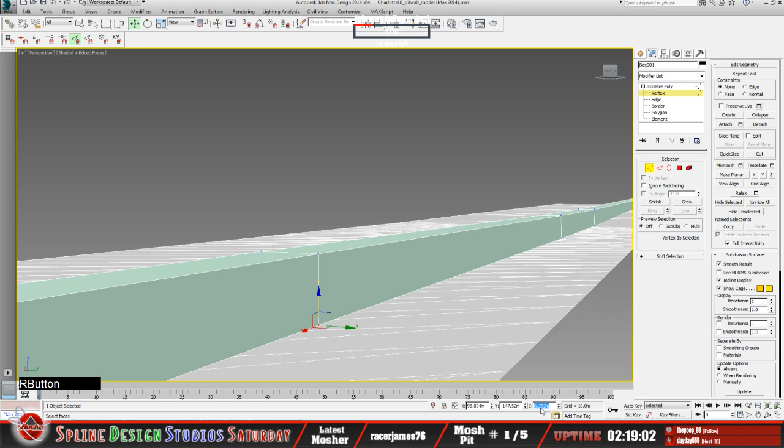So that should be the same on those, since we put those all at the same level there. Now is this still - wait a minute, why is that still - whoopsie. Kind of goofed here. So let me get this vert and copy that. So what I didn't do is adjust this one apparently, because it's still below the track surface. So let's select that, paste that into here. There we go.

Now I want to check these two because I don't think - copy that into our calculator, paste that, minus.

Copy that into the calculator. And equals. Yep, 4.91. So that's what we want. I think we're right where we need to be. That should be fine.

So that section of the wall's good. We'll move right along here. Yeah, so this would be the pit exit down in this end, so that's what we just did. So we've checked this out here. This shouldn't be too bad, but let's check.

Gotta hate how the zoom keeps doing that, so I could zoom in on this. Let's see where we're at here. See, this actually isn't too bad right here. We don't have any of it below the track surface, so that's good.

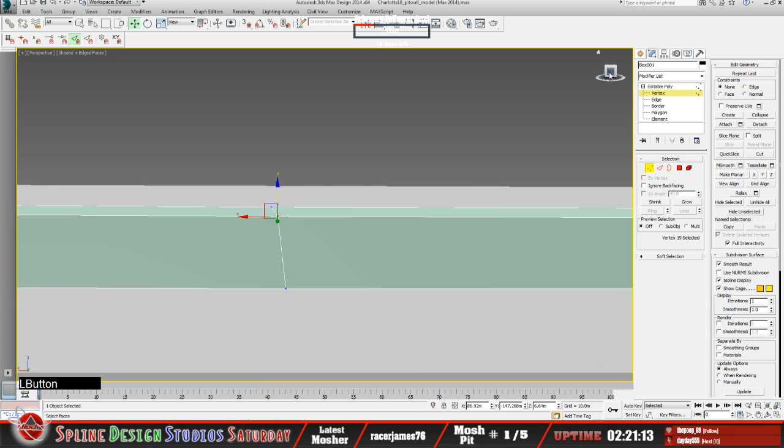Alright, let's put this on a straight-on view here. That's not straight. What the heck? Alright, hold on. Okay, one vertex selected. Huh.

Copy. Paste. There we go. Yeah, so let's say that didn't straighten up there. I don't know what I did. Yeah, so that should be straight.

And let's do this on the back side. It should be the same issue here. In fact, let me go ahead and copy this again on the X and paste that to here. So I want that the same on this side of the wall.

Yep, so just the one vert selected. Paste that. Wow, that was that much off. Holy smokes. Must have been. Okay, so that's why I wanted to copy that over.

So now I should be able to take that and paste it to this vert. There we go. So that should straighten that out. So let's put that on a straight-on view. Zoom in on that. So that one's nice and straight now.

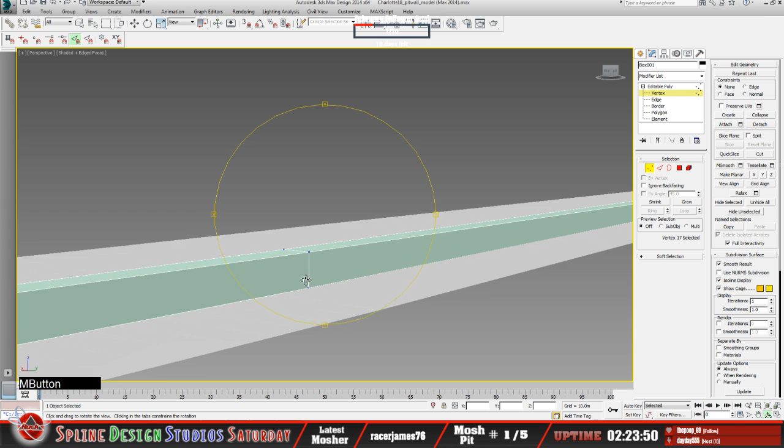So let's check this one here. We'll zoom in on that. Let's go over to a side-on view. Zoom again. Yep, so it's straight. That should be good.

Bottom-wise, that looks decent. Let's check the top. As far as we'll bring in our geometric wall again.

So let's do unhide 4. Okay. And then, yep, so that's actually not too bad. Right about there.

Actually, I didn't want to do it that way. I'll probably just go by this vert on the Z. We'll copy that and paste it over to this vert. So those are the same.

Which is, okay, I had it pretty good there. So height-wise, we're good. So I can take out the geometric wall. Let's hide that. Okay, go back to our model wall. Okay, so height-wise, there's good as far as in comparison to that.

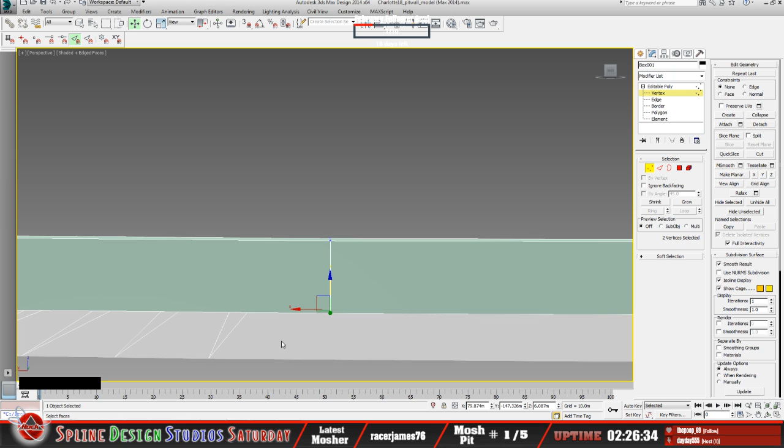This didn't look like it was very straight, so it's... Oh, wait a minute. Son of a gun. Alright, hold on. I see what I did. I had two verts selected. You get it this way.

So 94. Yeah, so this should be good. So let's check this one. 79874, that's good. I did them both at the same time, apparently. Yep, so all those are at the same. Those are straight. That's good.

Now I want to check the distance. So I want to take this Z, copy that, put that in our calculator, and minus out this here on the bottom vert.

Paste that. Yep, we're still pretty good there. We're within, you know, a thousandth or a hundredth there. It's not entirely critical, we're not super duper off. I'm happy with that, so I think we should be good. We're going to check the very end of it now just to make sure, but I think we're a lot better than we were.

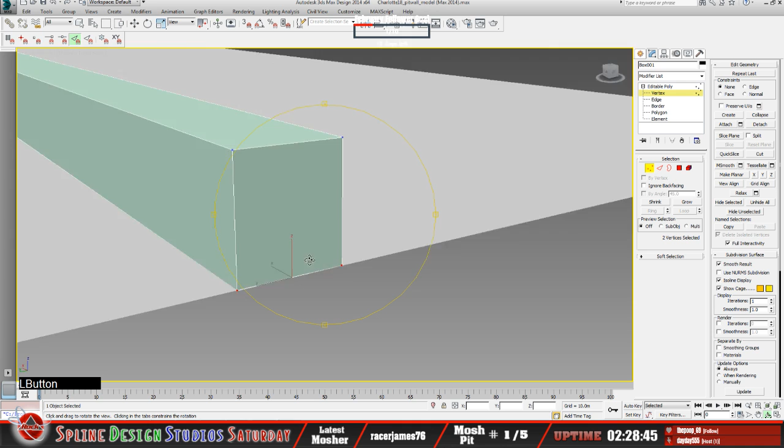Yeah, as far as getting that lined up properly to our track geometry. Okay. Yeah, because on this end you can tell a lot better as far as how this is. So I don't think we got any problem on this end. This is the pit exit end. Yep, so we should be good. We are good to go.

It does have a little bit of crook in there, and I think we did kind of witness that. There's a little bit of a crook in here, even with the, as far as how skinny it gets on that end. It's not 100% straight, it's got a little bit of a crook in it.

So you kind of see that same. Let me look at it from the same, let's do it this way. So if we go down this way, we're looking at it the same way. Let's get out of this view. Just want to line it up the same way here, so we're looking down. Yeah, kind of the same idea here, trying to get it lined up somewhat the same so we can see the same.

Alright, so there's that end of the... so if we come up just a little bit here. Okay, so you can see there's just a little bit of a crook there. There's probably a little bit more of one in this. And keeping in mind, I guess we're trying to line up based on... I don't think it looks that bad, actually. That's pretty good, so it's got a little bit of a crook right in this part.

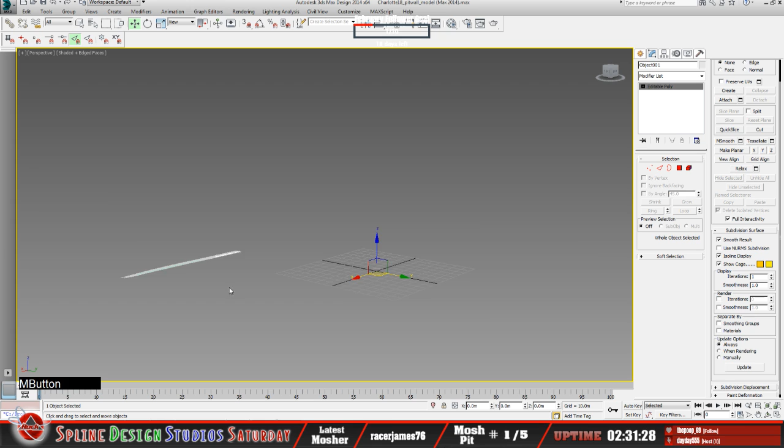Object 1. What the heck is that? I don't know what that is. The only thing I want to keep in here is just the track surface and the pit wall, so this I don't think is anything. Here, let me keep this to object 1. I don't know what that is.

Alright, so we will hide that. Oh, okay, so that, I think that was another... oh, I remember what I did, I got it. So this is the old one, when I tried to segment that out last time. So yeah, I'm not going to keep any of that, so we'll delete that. Let's unhide.

Yep, so object 2, that was another piece, we're not going to keep any of that. That was from our previous attempt, that was the wrong geometry of the wall. So this one here, object 3, or sorry, object 4, this is our new pit wall that we've been going by. So that's what I want to keep, as well as this track surface that we segmented out.

Okay, the rest of this track geometry we can get rid of, so this I can delete. The only thing I need to keep is that. That'll work good, that'll kind of save space, I guess, as far as the scene goes, as far as just having in there what I need to have.

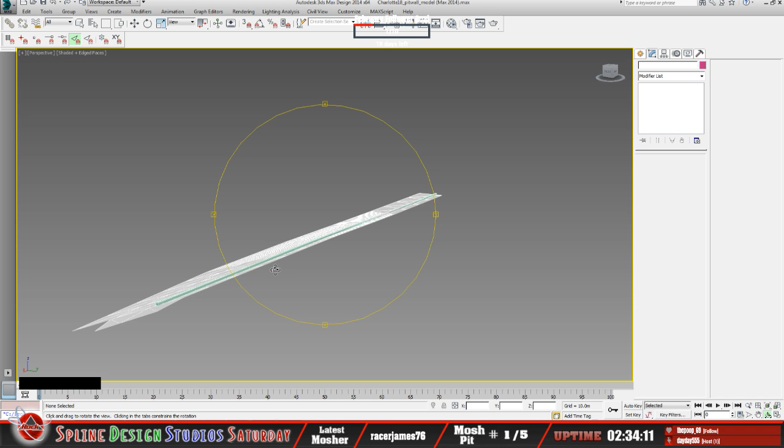Okay, now from here we can get to what we were trying to do in the first place. We had to backtrack a little bit there. We had the general idea as far as how to get the shape of the wall, the height, width, and thickness that we needed, and getting it to match the contour of the track itself, as well as how the wall works with the track spline geometry. That was the trick, a little more involved than I expected.

So with all that being done, now we're at the point where we can actually texture this. So what I'll do is hide these two again, should be good on that, and just keep our 3D modeled wall.

Before I do anything, I'm going to segregate those out again like I did previously at the very start of the stream. I'm going to select the polys that are going to have a separate texture, so let's select all these top polys and detach that to an object. For the sake of this, I'm just going to name these top wall, just so I know. So that'll have a different texture on it.

So the rest of this will have the other texture, the wall texture. From this point I can hide this one, so let's hide that. Now all I got left is just the polys that are going to have the wall texture.

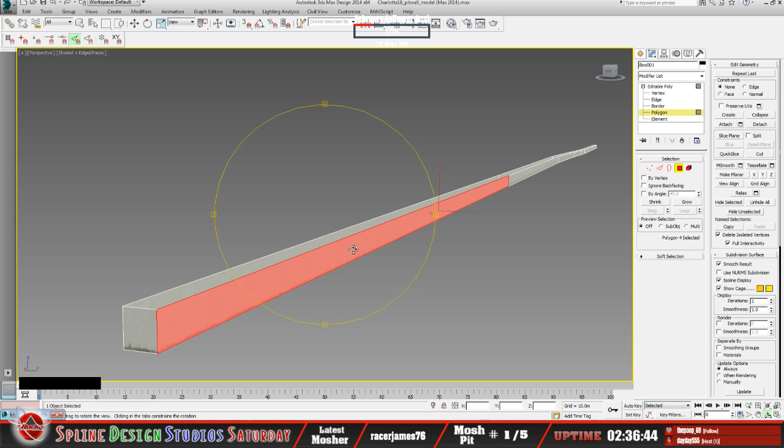Okay, now we need to get an unwrap modifier on this, and we need it to be at the beginning of the stream. So we had some adjustments to make to the object, and that's not unexpected. I was going by the idea that this was going to be 100% flat, and it wasn't, so we had to adjust - you can see it's got a little bit of a crown in the elevation there. We could probably fix that in Sandbox if we really wanted to, but the more I ponder it, I'll just go ahead and leave it. This will match what's in the geometry anyway when we put it in there.

So let's go ahead and apply our unwrap modifier like so, and open this up, make sure the texture's in there. I'll widen this up a little bit. One thing I didn't do, and I'll go ahead and do that now, is go into preferences here and change this as far as the size of our texture.

It should be 512 by 128, and I'm going to double check that just to make sure - 512 by 128, yes. You can't necessarily see that in here, but that's the size of our texture, so I want to adjust that in here. So let's do 512 by 128. Okay, so we got that size in there.

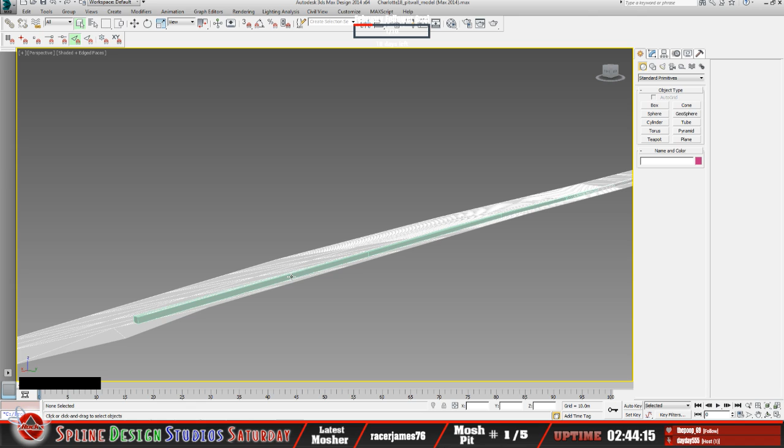Okay, so we got that all squared away. So now what I'm going to do is reopen that scene, now that I got that saved, and navigate to that. Charlotte18 pitwall model, there we go. So the only thing we should have to reapply to this one here is the texture and the unwrap. That's all we should have to do.

Everything else should be good. So I want to hide these two. Whoops, why is it not... Hide? Oh, I don't want to hide it all, you dummy. Whoopsie. So I'm going to bring at least this back.

There we go. Alright, so now I'll go back into our material editor, go back to this process, switch this over to standard. Okay, and then go to our diffuse, bitmap, put our wall texture on that.

And one of the things I didn't do, which is not a big deal, I can still do that. I didn't segregate the top of the wall, I guess, from that, but I'll do that right now. Still got this as an editable poly.

Okay, so we want to get this like so, and I want to go to poly, and I want to separate all these top polys from this. That's going to have a different texture.

As I explained earlier, as far as using a multi-sub object type of deal, it's a little bit easier as far as what we're trying to build this for, and probably much the same for texture mapping anyway. It's better to just segregate your model as a whole, if they've got different textures on it, to separate and detach it as a separate object, as I'm doing here. It'll make more sense doing it that way than as a multi-sub object, because you can sometimes forget that you have that multi-sub object. For an object for NASCAR Racing 2003, if you have that multi-sub object, the textures don't necessarily get applied properly if you use it that way.

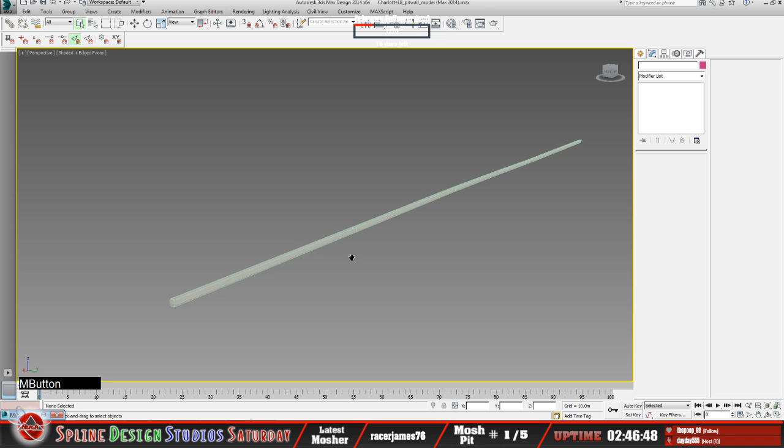Alright, so go ahead and apply our unwrap modifier this time around, like so. And then open up the Edit UV editor. We should be able to apply the texture.

Alright, so we're kind of repeating a lot of this stuff, we're having to go backwards. So yeah, so now we got our wireframe in here. You can see that that's what wasn't happening when I applied that initially. So now that we have that in there, that's good.

So now I'm going to go into Preferences, and I'm going to adjust the size of this, because our texture is a 512 by 128, power of 2. I do apologize for all the backtracking and having to redo things over again, but sometimes these things happen.

Alright, so that's all good there. Yeah, so this is what was not showing when I applied the unwrap modifier initially last time around, so I think it was just a matter of refreshing. I think I was running out of memory there a little bit, so I closed Sandbox, reset this. I already saved the scene, so that was a good thing.

Alright, so now at this point we should be able to select our polys. That's better, yes, this is what I wasn't able to get it to do. So now if we go in here, we should see that selected. So I'm just gonna filter the polys that I got selected, so that it takes the rest of them out.

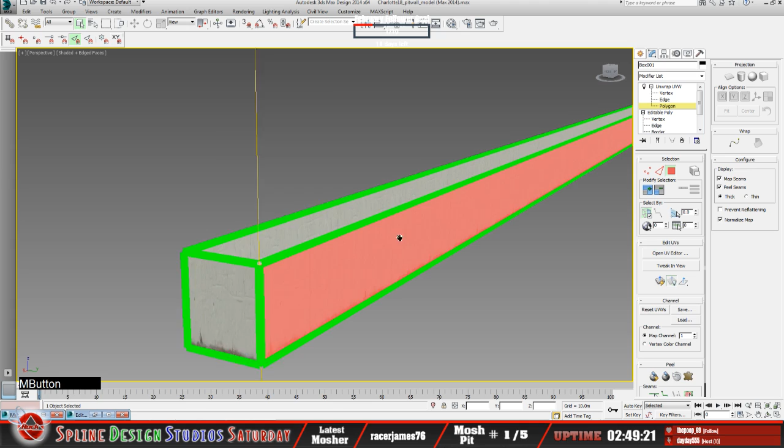The fact that it's populating in this fashion, and we can see what's happening with the texture literally here. Let's zoom in on that. Let me do my F2 really quick. It's going to change my scene, I know that, but there we go. So as you can see on here, how the texture is applying, we got the orientation of it is perfect, so we don't need to change that.

So the way we've applied the unwrap modifier, as far as how it's putting it on the poly right there, we don't need to do a flatten or a normal map in this case. And the fact that it is a simple model, it's not very complex, the only thing we're finding necessary to adjust is just the height of this. So we want to get it to fill all of this up with this texture, not just halfway through, because that's not scaled properly.

So I'm going to zoom in on this. I already went through a lot of this already, but we had some issues, so again, apologize for the backtracking. So what I'm going to do here is shift drag this up. This way you can see how that's adjusting on the actual model in here.

So the fact that now I've got the poly filling all of this area of the texture and not just halfway through, the orientation is right, so it's got the dirt. As far as the orientation of the dirt is on the bottom here, that's what we want. I know it's kind of hard to see with the green, but you can kind of see it here. So the orientation of the texture on the poly, as far as it being flipped the wrong way, it doesn't exist.

So the rest of this, as far as the way it's scaled, will fall in place with that vertical tiling of the texture. We'll just leave that like it is. Don't need to adjust anything else. Okay, so that poly is mapped.

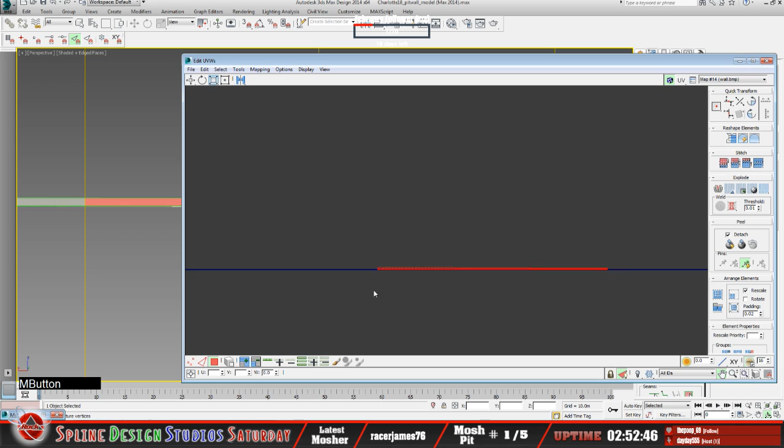What I might do, for the sake of this, two things. One thing being I want to get this over to the texture - I don't intend to put any ambient occlusion on it as far as shading. So that's one thing. But the other thing is I want to get this over to the start here so that they're all starting at the same point instead of leaving it here. I couldn't necessarily leave it here because of the way the texture is tiled - the texture being applied to it is tiled. But I want to bring this over this way.

And then what I'll probably end up doing, for the sake of this, is zoom in on this here. We'll get this lined up. Again, I have not applied either a normal or a flat map, and I don't feel it's going to be necessary. A lot of this might be because of how it's tiled.

Because considering all these polys, as far as you go down, they're attached. So I did adjust on this end of this poly up, but I did not adjust this end as of yet - that's probably why I'm seeing that trajectory like I am at this point. The wall itself is fine as far as the height, we already went through all that as far as how that needs to go. But what I think we're experiencing here is when I adjusted this poly, I adjusted it to the proper height, so it's only that same height on this end of the poly, which is this end. On this end, it hasn't been adjusted yet, so that's why it's showing this trajectory.

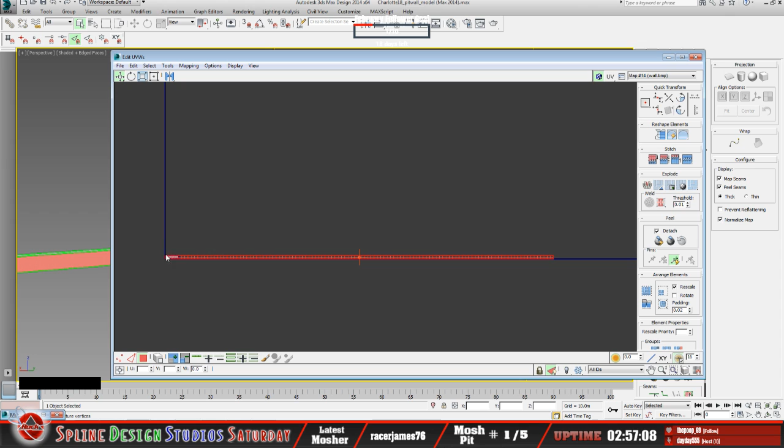Zoom in on this. So if I was to shrink this down, take this and scale it down to like half the size, the way the texture gets actually applied to those polys is going to change. So I don't want to do that.

Something happened here though, that's not good. What the heck? I kind of stretched this out, that's not right. Why did it do that?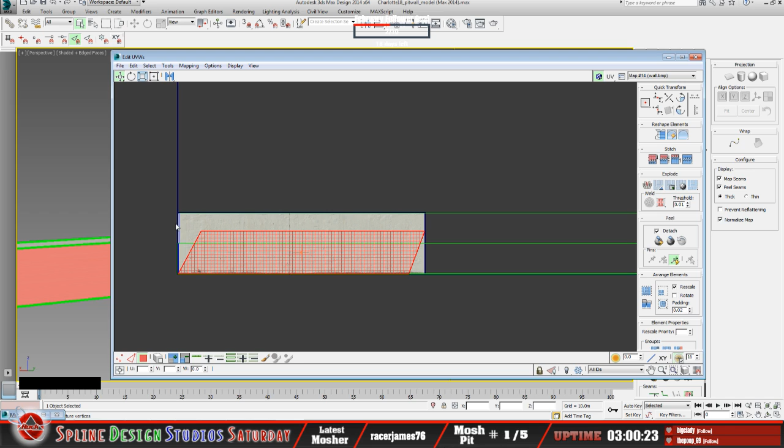Alright, so what I'm going to do... Oh boy, oh boy, oh boy, oh boy. I don't know why this is making it harder for me.

So let's turn the grid snaps on. It really shouldn't have done this, and I'm not sure why it did. Grid snap that.

And these two here, I'm just going to go ahead and... Yeah, there's no other verts in there that I know of. Let's vertical snap that. Okay.

Now let's filter that out. Do a vertical snap on this. Yeah, that's just kind of interesting as far as how it's... Okay.

Let me see if I can scale this back. Scale this back out. And...

This is really making me unhappy - I don't know why it's doing that. That should not have done that. Why is that doing that?

Huh. Wow. Okay. I'm really not sure why it's doing that. I've never had that happen like that before.

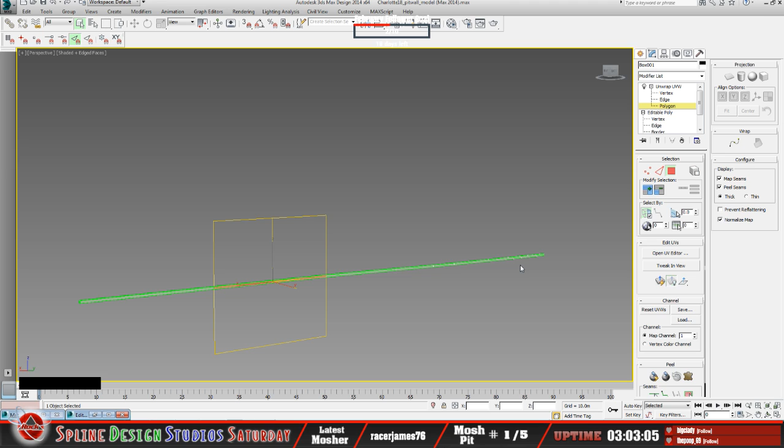So I'm going to remove this edit modifier, just delete it, and I can start over. That actually makes more sense now than the way I've gone about it so far. Okay, let me go ahead and remove this unwrap modifier.

Okay, so now what I can do is apply that again. I still got the texture on it, we're still good there. All I need to do is reapply the unwrap. So I don't want to use that one at all. I'm not going to try and fix that mess that was in there. You could probably do that if you're so inclined, but I'm not going to. That's just too much hassle. So at this point I've got a brand new unwrap modifier in this, so I'm going to go ahead and just apply texture.

Leave the polys just like it is, like this. And I'm going to select all those faces on this side all at once instead of doing them one at a time.

This is probably the best or better approach. The way I was going about it, I was kind of considering if I wanted to scale each one independently, but the way this wall is, and we want that texture to be uniform - it's all one texture, nothing's changing, and it's tiled horizontally. You could probably get away with just doing it this way, as far as the way I'm going to do it right now.

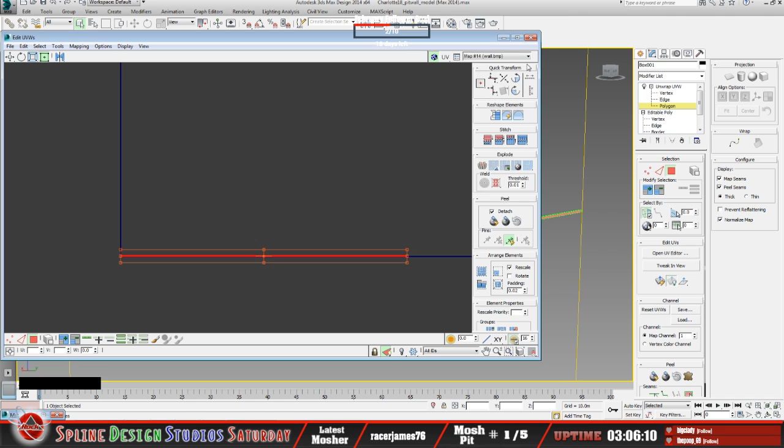Like I said, I was keeping in mind if we wanted to apply any independent texture to any section of these polys, that's the approach I was taking to it when mapping it. And that's not 100% wrong the way I was doing it, it's just the way it was presenting that texture, repeating horizontally like that, wouldn't have been sufficient.

So now if we look at this here, select this poly, zoom in on that, kind of focus on this a little better. You can see - alright, let's deselect that. Now if I render this now...

Let me see if I can get this here. So if I render this - yeah, it's kind of hard to see in that one. Let's get it zoomed in a little bit more. Not quite that much. I know I have not figured out a way, I guess, to get the smoothing as far as the zoom - I know there's a better way to get it to be a little bit less wonky, as far as, alright, so now let's try and render this.

There we go, so you can kind of see it's got the dirt on the bottom here like this, and it's scaled properly. That's actually didn't turn out too bad. And that should be the same uniformly all the way down this wall here.

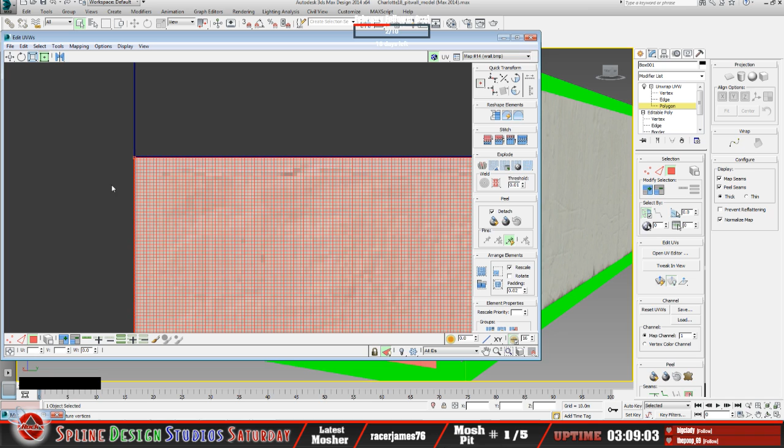I can zoom in here a little bit more just to get it a little more precise. And if I turn off the filter, you can kind of see how the other one, I got that lined up too.

If I really want to get super duper picky to get those all lined up perfectly, I could do a grid snap, get those on there. I'm not going to worry about that too much right now, but you can see how it's not 100% lined up.

So I put the poly back on, let me select this in here. There, so this is the one. The other green line represents the previous polys that I lined up there, and it's not lined up with it, so they're not all 100% lined up, and that will probably show.

I can tweak that later, not going to worry about it right now. But we should have this textured, so if I render this... there we go, we got that wall rendered. That poly is mapped, you can see how that dirt on the bottom is lined up very nicely.

Okay, so now we want to get the back side of the wall. We'll do that much the same way. Oh my goodness, I hate when it does this. Why you doing me like that?

Yeah, this is a pretty big segment of wall, to be honest. Alright, so I think this was the one. Okay, let me check that again. Yep, so that's the one we did there.

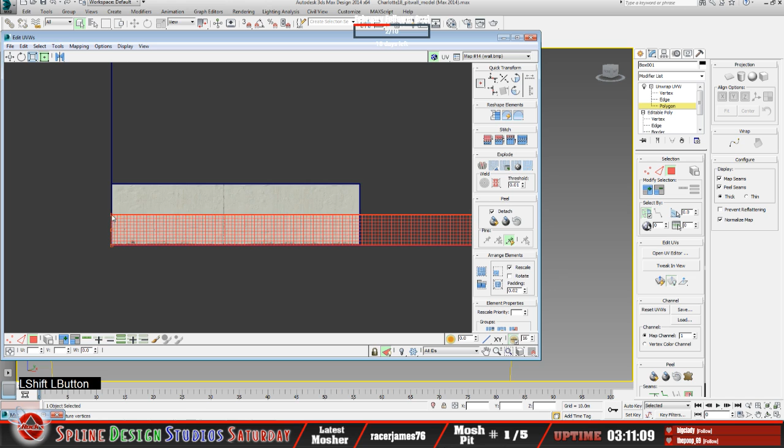Like so, and we go into our Edit UVW, we're going to filter that out. And again, we'll just shift drag this up, just adjust the height of that. The orientation of it, as far as the dirt's on the bottom of the poly and all that stuff, that's all good to go, we don't need to mess with that.

Alright, zoom in a little more. So, like I said, if I turn off the filter on this, you can see how these don't all 100% line up. And I could get really, really super duper picky and just select those all till they're all at the same height.

And I guess while I'm in here, I can go ahead and do that, because to include... this one's not even all the way over that way, so let's go ahead and I'll put the grid snaps on.

Let's go to vertex mode, and I'm going to use this deal. Nope, my bad, this deal right here, this freeform mode, and wait a minute, what is going on there now? That should give me... alright, hold on here, we'll get this figured out.

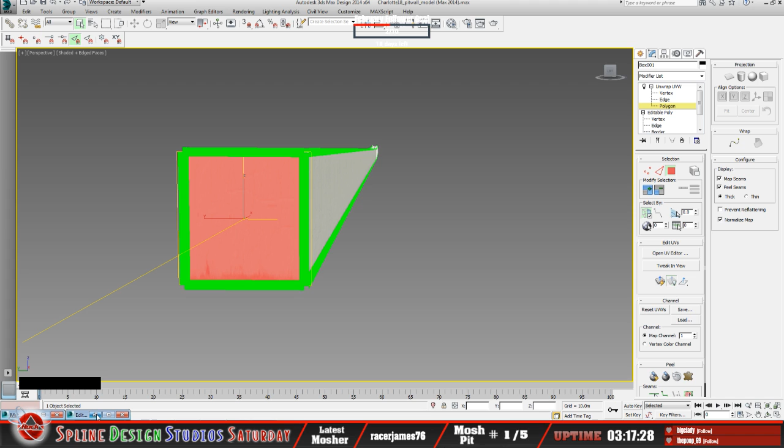Okay, so now we'll select this poly and get this end, and then the only thing we'll have left is the top. So with that one selected, we're going to filter out.

I took those all the way down. Oh, okay, oh, let's just turn the tiling off altogether. There we go, that'll work.

So now we got this poly selected. So I have not filtered out the other poly, so I can pretty much line that up with the other end that I did there.

Okay, so if I go into this one and just shift drag this up, and I can get that close. Now what I can do, by not filtering out those verts, I can go into vertex mode. Got the grid snap still on.

If I select this here, that's okay, that's the cursor that I was looking for right there. Not sure why it wasn't doing that before, but in that freeform mode you should get this precise movement here - you should have all these little box things. That's what I should have got. I'm not sure why I wasn't getting that, but it did still let me grid snap it.

This here, so now I can snap these all like this. And if I go to this end, I can get that lined up so that lines up the same way.

Yeah, see, this is not snapped here, see how that is? So I can probably snap that right there, and then snap that right there.

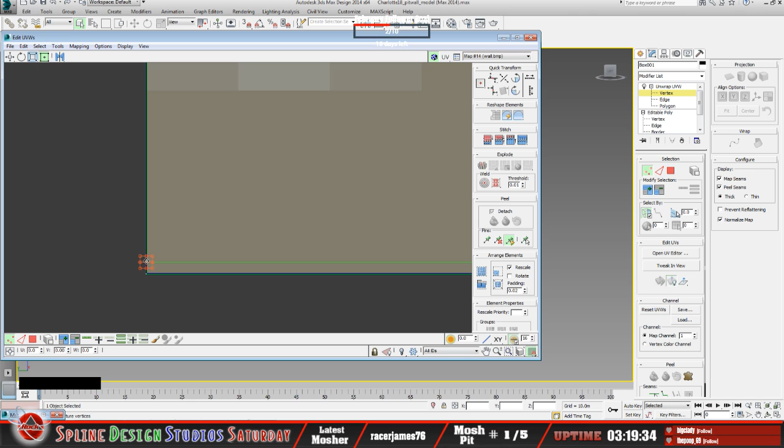That's good there. Now I'll have to go all the way down to the other end and do the same thing. Yep, zoom this out here, go all the way down here and do the same thing.

And again, I'll have to picture that texture is there. You can see that blue line right there - that's what we want to be lined up to.

So just like that, and I can do the same thing. Oh my goodness, what the heck? Must have clicked - getting a little click happy, I guess, with my middle mouse. Kind of wonked me out there.

So yeah, I can do the same thing here. I can do a vertical line here, just to make sure that it's all nice and straight. So that's good.

Probably another thing I would have to do, and this is so long - yeah, so I'm not going to worry about it too much. But the other thing is it's probably not aligned 100%. So if I zoom in on this, you can kind of see how much it's off this way, as far as they're not 100% aligned.

So let's see if I can do this really quick. This is a pretty long one, holy smokes. Alright, let's see, so still in vert mode. What I would have to do - this can get a little bit tedious here.

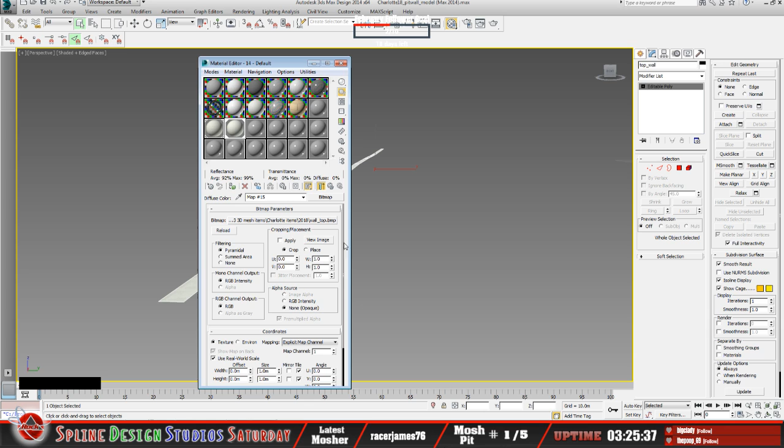Okay, and then we want to apply that to it, like so. So that should be applied to that now. And now I need to apply an unwrap modifier to that one as well - two individual pieces, even though it's relatively all part of the same wall.

Alright, so open UV editor. We're going to make sure texture is here, and stretch this open here. Much the same way as this one, I've got to check our wall top dimensions here, which should be... this one is 512 by 128.

Alright, so we're going to adjust that. Yep, so you can see our wires in there. This one we might have to do a normal map or something - we'll have to see how that goes. Let's adjust our preferences, change this to 512 by 128.

Alright, so we got that. Don't need to tile it or anything, that's fine.

Now go into here, we're going to select poly. I've already got those all selected. So if we go in here, that should show in here like so.

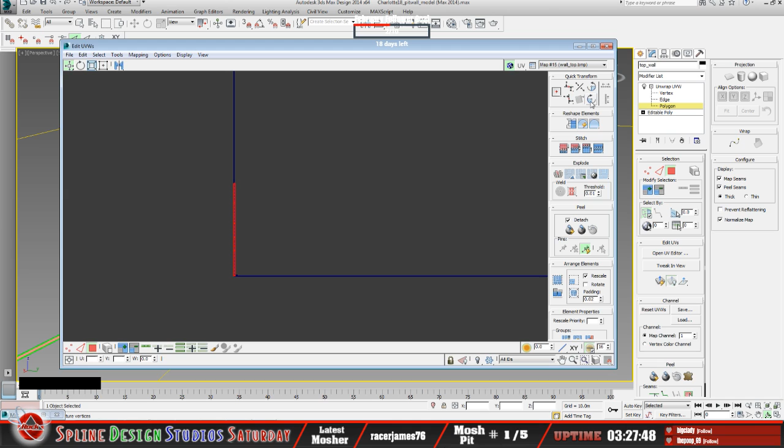So let's do rotate 90 degrees. And then I can bring that down here.

That should be. Now it might be a little bit tougher to determine, so I'll have to look at the model itself here as far as what orientation this has here. So I'm going to shift drag this down here.

Yeah, so in order to know that I got the proper orientation, you know, like this edge of the poly is where it needs to be and so on. Let me look at this, look at it this way here.

Alright, so let's deselect that. Let's take a look and see what we got here. Focus. Alright.

So what I'm pertaining to is like, okay, is this edge here, as far as on this edge, is that where it needs to be on this? You know, so is this edge going to be this edge?

And what I might be able to somewhat tell is how some of the patterns are in this area. So I got a couple lines right here in the texture. I should be able to see those in here.

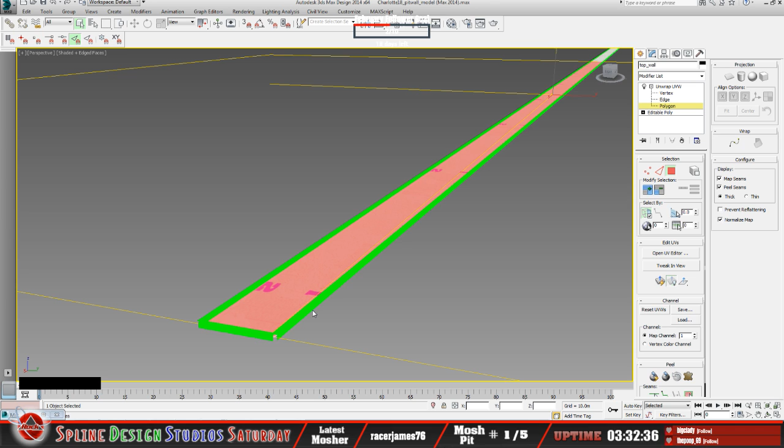And I want to make sure... Oops, I got out of that viewer. I want to select all these polys. Okay, I want to make sure they're all selected. Let's zoom out on this. Select all those polys, and I'll flip these so that... and see if I can get this into view here. Let's go, first of all, I want to flip it this way.

Alright, so that's almost right. Now we need to flip it the other way, because that 2 is backwards. We got that 2 where we want it, but it needs to be flipped the other way now. So we'll go ahead and select all those polys again.

And flip it this way, vertically. So now that should be... there we go. Now we got it oriented correctly. We got the 2 here facing the right direction, as well as the 1 on that end. So now that texture is properly oriented.

See, now what I can do is revert this, remove this layer, just delete that, and then save this over again. Save back over that, and that should reapply that. So now it's gone.

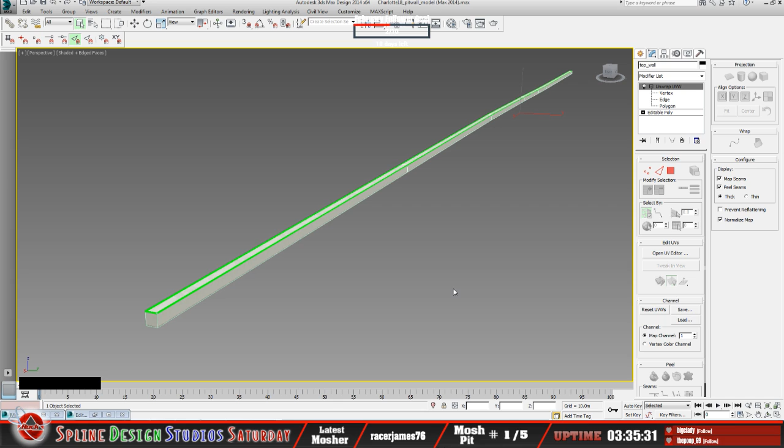But that does give you somewhat of an idea, and we'll probably have to deal with this again with some of the other objects we have to create, because we're dealing not only with creating a properly modeled object, to get the dimensions correct, but also following the contours of the actual track itself as far as the elevations that exist in it. So that's another factor we've never necessarily had to deal with as far as creating 3D models at this point. We had to backtrack a little bit, since we were able to do it nice and quick before, just a straight flat line. That wasn't the case here.

So that's what we've had to deal with a lot here. We dealt with all that, and we've got it pretty much where we need it to be at this point. We got everything mapped, so that's a plus.

At this point, the model is saved, so we'll be able to move on next week as far as getting this in there. This is all complete. All I would necessarily need to do at this point, and I'll show this a little bit and go over it again next week,